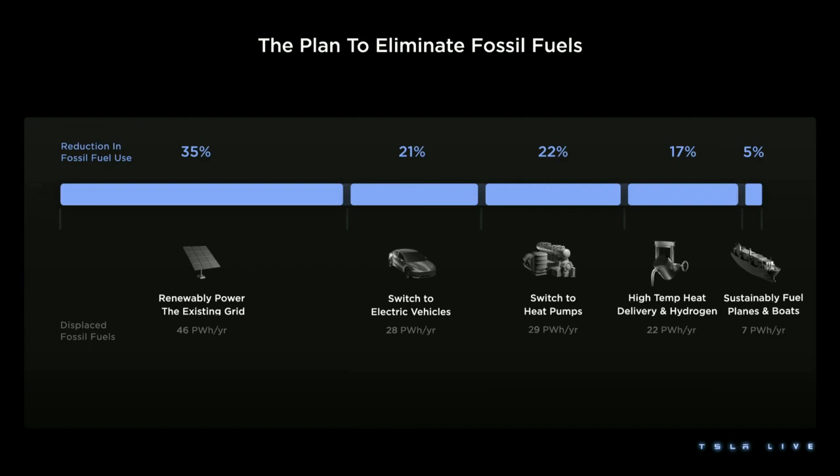My personal opinion is that as we improve the energy density of batteries, you'll see all transportation go fully electric, with the exception of rockets. That's awkward.

But you can make fuel with CO2 and water - you can make methane with CO2 and water, and you can do that with just electricity. In fact, on Mars, if we hopefully get there at some point, the atmosphere is CO2, and there's water ice throughout Mars. So you can take the CO2 and H2O and turn that into CH4, which is methane, and oxygen. So ultimately, even rockets can be electrified.

First, repowering the existing grid with renewables. This is going to be a consistent theme - you'll see our estimates for the number of terawatt hours, terawatts, and trillions of investment at the bottom of the page. This is already actively occurring in front of us. 60% of the generation added to the US grid was solar in 2022, and solar deployment is growing 50% year-on-year as of 2022. This is a serious upswing, and if we continue this trend, this is going to be behind us before we even know it.

Second, switching to electric vehicles. Again, 21% reduction in fossil fuel use by doing this alone. Obviously, Tesla is heavily engaged in this activity, along with many others. Overall, EV production grew 59% year on year in 2022, and EVs hit an amazing 10% market share. It's an awesome milestone, I'm super excited to see that.

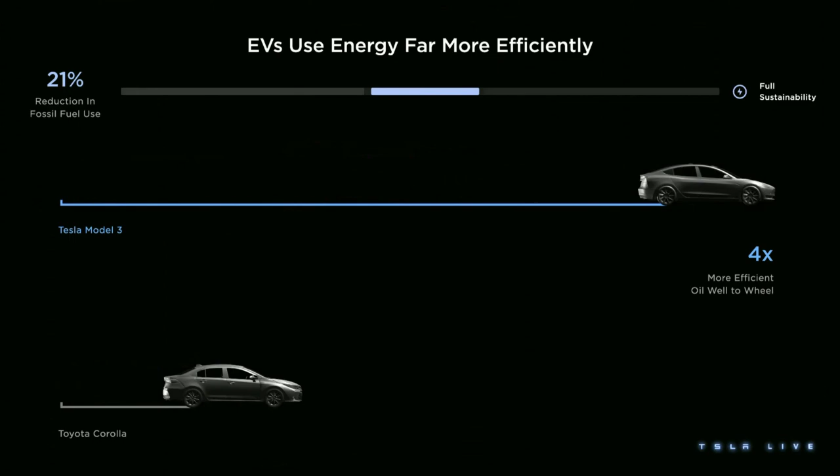One of the reasons why EVs are so enabling is this end-use efficiency point. Tesla Model 3 is 4 times more efficient from well to wheel than a Toyota Corolla. That's all about the efficiency of getting the electricity into the car in a sustainable energy economy, and then how efficient the car is in transferring that stored energy to motion on the road, compared to the engine in the Toyota Corolla and all the extraction, refining, transmission, distribution of the gasoline to the Toyota Corolla. And just for a fun reference, Model 3 can drive over a mile on the energy it takes to boil a pot of water for pasta, and then it can drive another mile on the energy it took to cook the pasta. And that pasta is 1 pound, and Model 3 is like 4,000 pounds - just to give you a sense of how little energy it really takes to move a Model 3, that 4,000 pound object, down the road.

Also, heat is a lot more energy than motion. But people just boil a pot of water and don't even think about it - it's just interesting how efficient these cars are.

Next, switching to heat pumps in homes, businesses, and industry.

Right now, heat pumps meet 10% of building heating needs. Install rates are growing 10% year on year, but it really needs to accelerate. Heat pumps can serve heat applications up to 200 C in businesses and industry. And from an investment perspective, as you can see on this page, this is actually the lowest hanging fruit in terms of displacing fossil fuels.

You might be saying, well, what exactly is a heat pump? Heat pumps don't create heat, they move heat. When you think about the natural gas furnace in your house, it is generating heat itself, but what the heat pump is doing is actually moving heat from outside of your house into your house. They're just an air conditioner or a refrigerator in reverse.

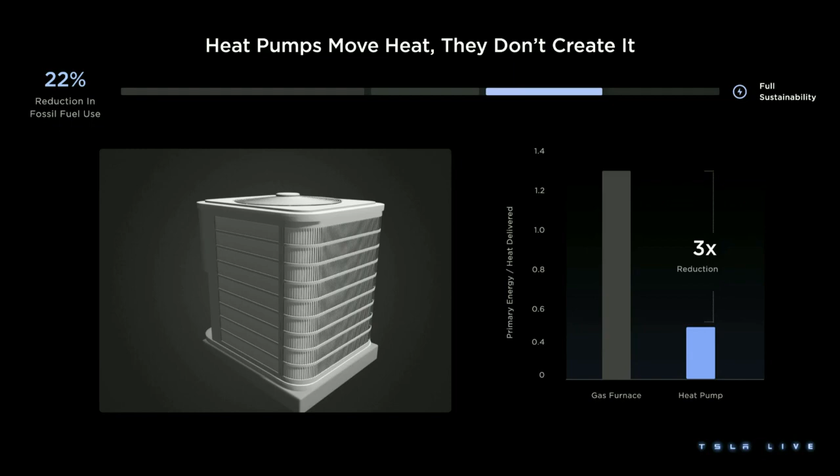So we're surrounded by heat pumps. They're all over this factory, they're in your house. And all this really is about bringing them in to displace all the fossil fuel heating in all of the homes, businesses, and industry that we can. From an end-use efficiency perspective, this is a three times reduction in the total energy required to heat these buildings. So a real obvious thing to do.

Heat pumps, they're in our cars now as default. And at some point, we might make a heat pump for our home. So, yeah, maybe.

Next, a little bit more detail on electrifying high-temp industrial chemical processes. Over 50% of industrial heat is greater than 400 C. Cement, steel, fertilizers, chemicals, plastics, metals refining all need up to 1,500 C. So we need a solution here.

Ultimately, it's purpose-built equipment that enables electrification. Carbon graphite is stable up to 2,800 C. There's other options in the 1,500 C range, like silicon carbide and other materials. The idea is you create and store heat when renewable power is available. If this is a sustainable energy economy, renewable energy is intermittent. At peak of the day, you've got more generation than you need. You make a bunch of heat then, and then you transfer that heat into the industrial process 24 hours a day using the stored heat you created when the sun or the wind was blowing.

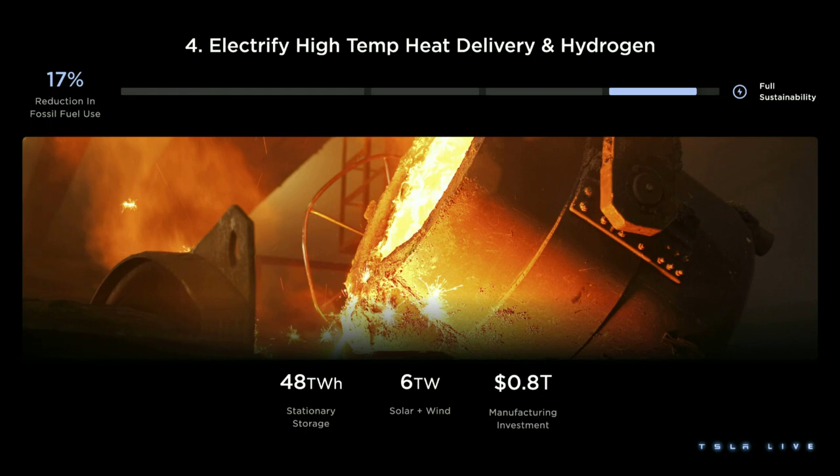That's the concept here. And on the hydrogen side, we also need green hydrogen to decarbonize metals and chemical refining processes, things like ammonia and steel making. There's roughly 120 million tons of hydrogen sourced from fossil fuel today to do these things. Hydrogen can also directly replace coal, which is currently used in a ton of steel production, through a process called direct reduced iron. You can replace blast furnaces with a hydrogen-reducing, direct reduce iron furnace. This is the way to eliminate fossil fuels from these aspects of the economy and the CO2 associated with them.

Some amount of hydrogen is needed for industrial processes, though there's room to disagree on the details. My personal opinion is that hydrogen will not be used meaningfully in transport, and shouldn't be. If you're going to use a chemical fuel, you should use CH4, not H2. But nonetheless, it is needed for industrial processes and can be produced just by splitting water, essentially. Something that's been done for decades and decades. This is not rocket technology.

And lastly, a small part of the pie, but a necessary part, is sustainably fueling planes and boats. Shipping accounts for 3% of global CO2. It's ripe for electrification. Even with lithium iron phosphate, long-haul ships can be fully battery-powered. So that's a great opportunity to electrify.

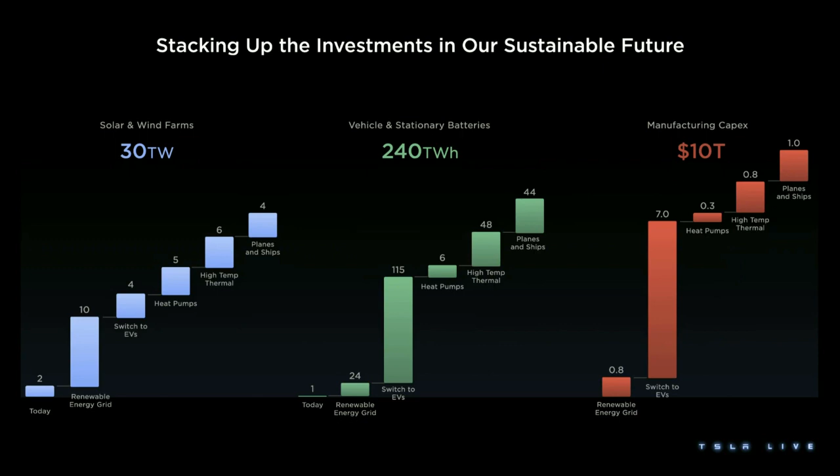So when we stack up all of these efforts, we end up with the numbers we shared at the beginning of the presentation: 30 terawatts, 240 terawatt hours, $10 trillion. And you may be saying, I need some context. Is this feasible?

Spoiler alert, it's entirely feasible. Just looking at it from a growth rate perspective, how much do we need to grow the deployment of these technologies? We're talking about only a 3x growth rate in solar and wind deployment. Solar is already growing at a breakneck pace, as is wind.

This gap is going to be closed really quickly. When we look at electric vehicles, they have to grow 11x. Well, they grew 60% year on year last year. That growth rate is also going to close that gap pretty quickly as well. And lastly, storage. Tesla's energy storage business has grown at 65% CAGR since 2016. The global energy storage business is accelerating pace as well. All these gaps are going to close, especially as this momentum of the transition to sustainable energy accelerates.

And of course, our goal on this page is 20 million EVs per year and 1 terawatt hour of stationary storage per year, basically as soon as we can.

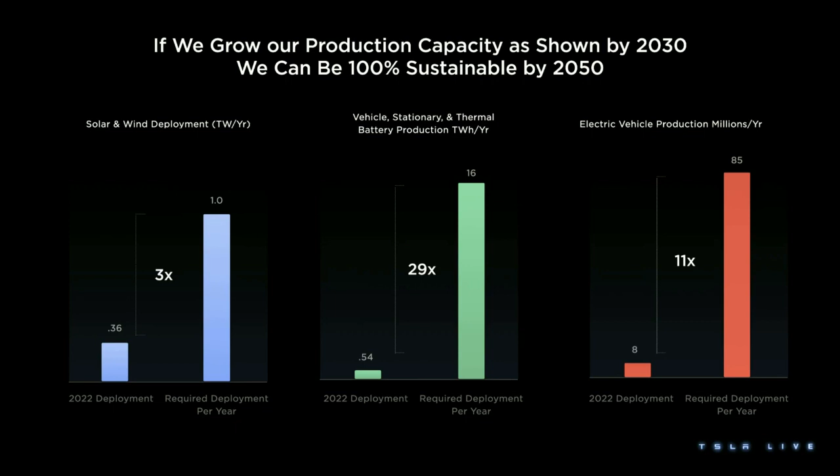And then, what about this investment? How do I have a reference point on this investment? Elon mentioned it's 10% of one year's world GDP. Another way of thinking about it is, how does it compare to what we invested last year in fossil fuel infrastructure? It's 60% of that investment. So actually, building this sustainable energy economy is less than extending the fossil fuel economy from a year-over-year investment basis.

So very doable. When we look towards, does this fit on the planet? Absolutely, less than 0.2% of land. As a reference point, the total land area intensively farmed today is 12.5% of all land. You drive around, you see some farms, but you don't see them everywhere. This is more than an order of magnitude difference between farming and what we're talking about for sustainable energy land. And it doesn't need to displace farmland.

Forests or jungle or any kind of ecological preserve - it can be used in very sparsely populated desert regions, barren areas, areas that are just not really fit for development or otherwise used. So 0.2% can fit into a lot of places. There's essentially no meaningful ecological impact. In fact, transition to a sustainable energy economy would result in a substantial reduction in current ecological impact.

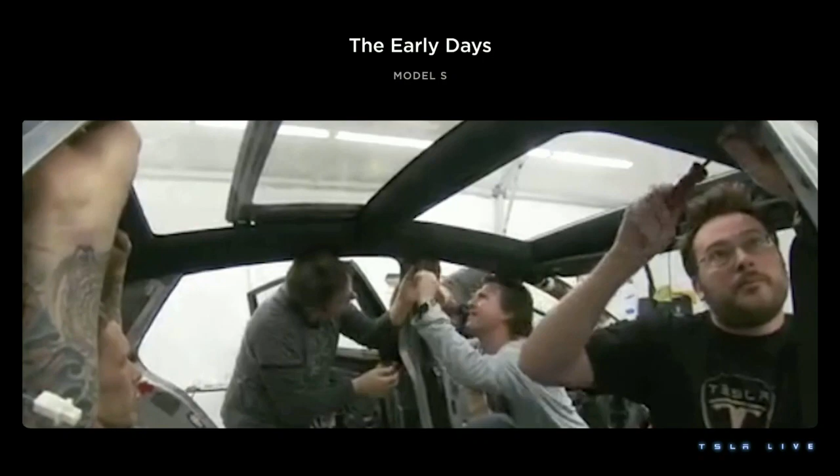I joined Tesla in 2008 to vertically integrate design into the company. It didn't exist before, it was a pretty small team. It was tasked with designing the most beautiful, innovative, and well-engineered vehicles on the planet. No small task in 2008, there was not a lot going on in the EV sector then.

Since then, we focused on constant improvement in cost, efficiency, innovation, things you'll continue to hear about today, while continuing to design the most desirable cars. Today we produce cars differently than we did 10 years ago, but the end result is always an exciting, futuristic, and desirable set of vehicles.

Back then we only had a handful of designers and engineers like myself, but we had a great vision to radically change transportation.

Back in 2008, when we were designing Model S, we didn't have a factory. In fact we had a really small engineering team and a tiny design team. But that allowed design to lead all the conversations. It let us innovate forward-thinking ideas, like how do you fit 7 people into a sedan? Or how do you make door handles disappear into the doors? Or putting a huge touchscreen into the center of the vehicle, something that had never been done before.

And then we won Motor Trend Car of the Year, in 2013. Our first great award, first car. Pretty good start, kind of a home run, I think.

Yeah, I mean, I think that's really important. When we were designing the car together, we didn't even know where we were going to build it. And so we came up with... I didn't even know Lars when we were designing. That's true.

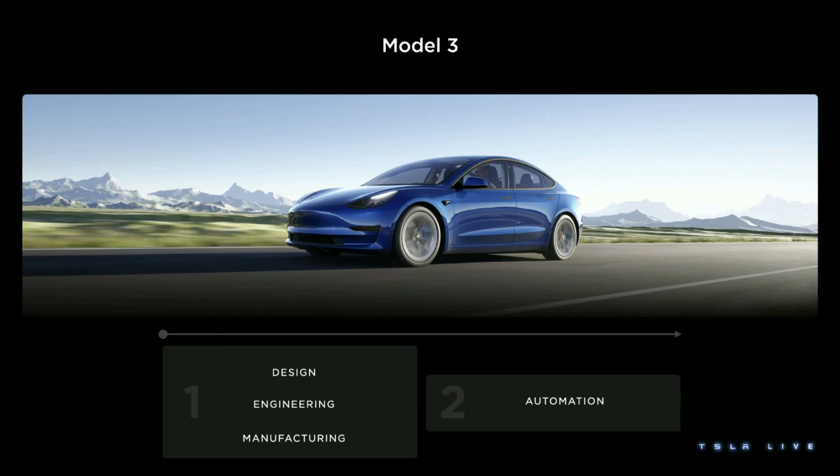As part of the master plan that you've read, Model 3 needed to be a smaller, more efficient, and more affordable version of Model S. But it had to be equally great. It had to have all the things that people loved in their Model S or Model X, but be much more affordable. So we approached the process a little bit differently than the first time around. Now we had teams that all worked together, so we were able to combine design, engineering, and manufacturing process all at the same time.

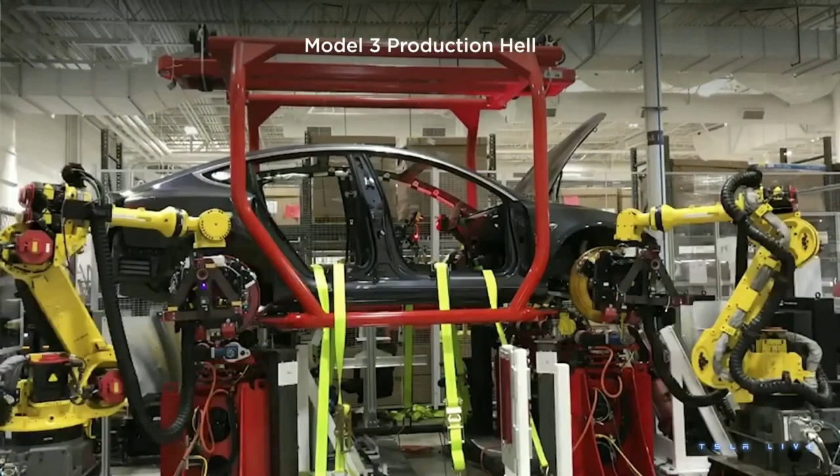But somewhere along the way, we changed the manufacturing process to be fully automated. And so we leaned into this whole new way of manufacturing a car, but we had already engineered it. So things didn't quite go as well as planned. It was an amazing product, but it landed us in production hell. Many of us who lived through that carry those battle scars. It was a great idea, but it wasn't the right timing.

Like Franz said, automating something that we designed to be built manually is super hard. And we have many, many failed examples of that at the Fremont factory that we ripped out. But some of them eventually still work. This is one I actually worked on with a small team of engineers. It's still running today, and some of the engineers who said we couldn't do it are no longer with the company, but it's running, and it's running faster than ever.

So we kind of self-imposed constraints on the design when we were doing it to be built manually, and we really didn't think about it. But despite all that, Model 3 is the best-selling EV ever. And Model Y, which is derived from Model 3, is about to pass that.

But we knew we had to improve the process further. And with Cybertruck, we designed a vehicle around a vision that actually started with the manufacturing process. And in this case, the materials dictated the design. Forming full hard stainless steel isn't rocket science, but it sure isn't easy. And it limited the way we could do it.

Yeah, absolutely. It really forced us to think about designing something in a way that you couldn't normally stamp panels. You couldn't form them in a traditional way. So you ended up with very linear bending processes that are just not in the automotive language of manufacturing today. But it actually created a very efficient process and one of the most dynamic designs ever, I believe.

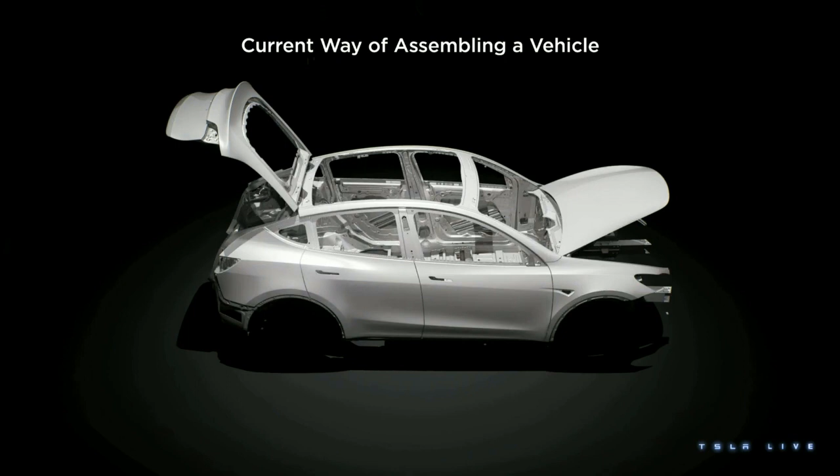You take all these stamp panels, put them together, then put them in a framing station. You build a body that looks something like a car, put the doors on, and then you paint them. Once you get the color, you take the doors off and start putting the interior inside the car.

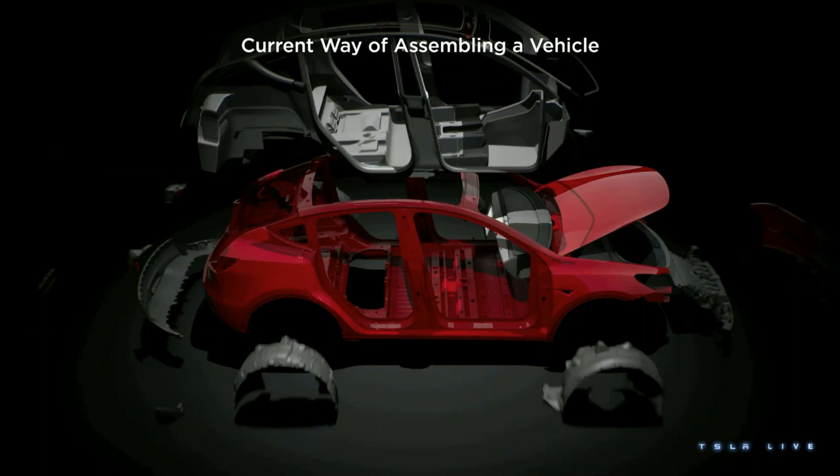It comes in through the openings that already exist. I wish it went in like one big piece, but there's actually people coming in and out of the car. There's awkward movements.

Then we lift the car up, we put stuff from underneath it, we put it down, then we put the seats in the car. And finally we close it all out with glass, and we bring those doors that went away for a trip, and put them back in the car.

Most of the time we're doing this with a big, giant car and moving it and doing really nothing to it at all. What's funny though is that just recently Toyota called this an engineering work of art. True.

The Model Y - that was humbling, but at Tesla it's not good enough. If we're going to scale the way we want to, we have to rethink manufacturing again. As part of the master plan, we have to make another step change in cost.

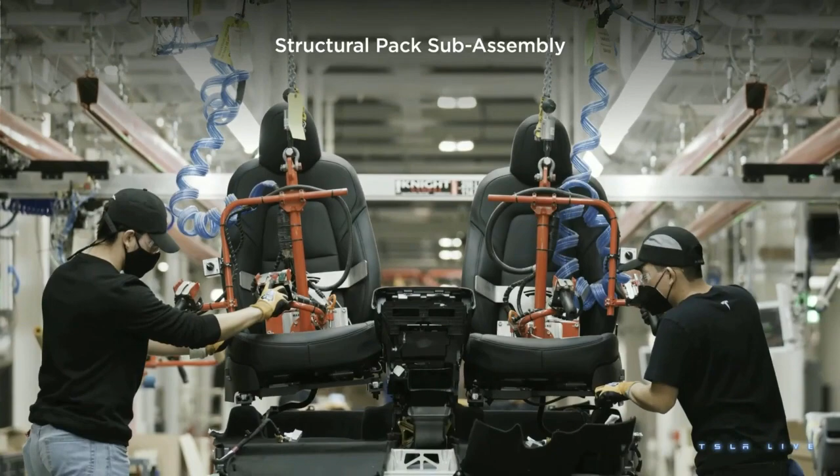We simplified assembly with the Model Y structural battery, where we decided the floor should be a part of the car. The battery is the floor. We put the seats and the interior on the battery, and we bring it up through a big open hole, and we assemble it. This allowed us to do things in parallel, fully rethinking the process and reducing the final assembly line by about 10%.

And we thought maybe we could do this other places. Yeah, in a way the constraints become part of the solution rather than a problem.

So when you think about what I'm trying to say, I really want to hammer this home. When you have a car that's about 5 meters long, and you have people working around it like we did in Model 3, and we change that to this process where we take different parts of the car, and we can do more at the same time, like we did with the Model Y structural battery pack.

What you see here is us doing that on the front part of the vehicle, or the rear part of the vehicle. That means we can get more people, or robots, working on the car at the same time. That means we have better operator density, less time doing nothing.

I call that space-time efficiency. It has nothing to do with quantum mechanics - we can have that conversation later. But we get 44% more operator density, which means more work, less time walking back to the station, 30% improvement in space-time efficiency.

And because we're not building it in and out of the car with those slow movements of those robots I showed you from production hell, when we go to automate it, it's going to be a lot easier.

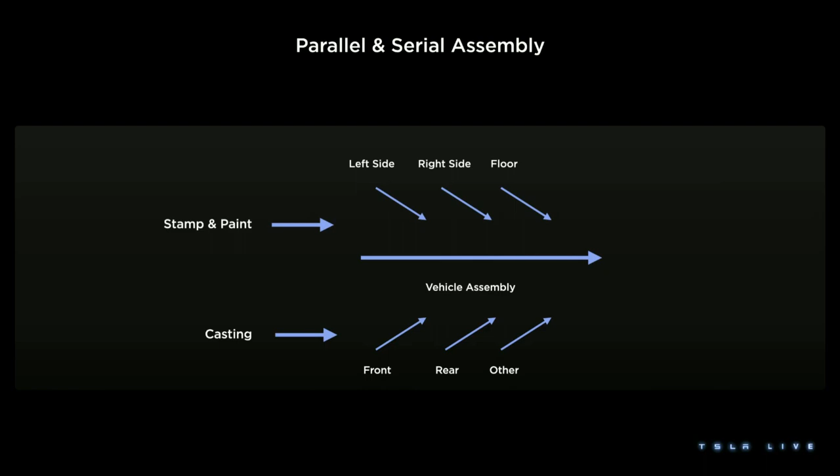In the end, that will probably look something like this, where we balance parallel and serial manufacturing in a way where we only do things that are necessary, with a much shorter final line, blocking a lot less of the entire rest of the factory, so we can optimize material flow using the best practices.

And what that means is it's going to look something like this, where we build all the sides of the cars independently, we only paint what we need to, and then we assemble the parts of the car once and only once. We put them where they need to go.

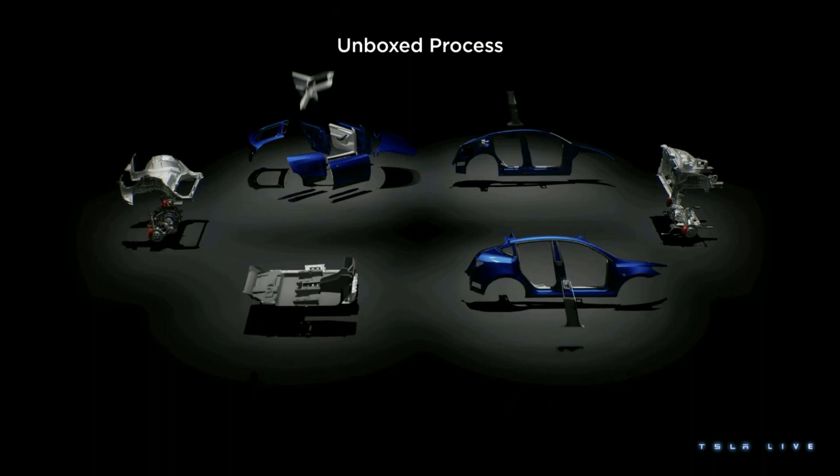The interior is attached from a bottom-up or top-down strategy, so there's more access for those robots and people. We aren't moving heavy objects around and doing nothing to it, and it means we're doing more work on the car more of the time.

And then, when we take all of these tested sub-assemblies and put them together, we finally assemble the car only one time, putting the sides on with all of their parts to a front and rear that was already assembled, carrying the floor in with the seats, and finally boxing it out with the doors one time - just like Cybertruck. So in the end, you get the same car, but it's not going to be a Model Y.

Yeah, this is not - this is a Model Y for illustration, not the next-gen vehicle.

In the end, what does that mean? To increase the scale and adoption of electric vehicles on the orders of magnitude that we just showed you, we have to make constraints part of the solution. It leads us to greater than 40% reduction in footprint, which means we can build factories faster, with less CapEx and more output per unit.

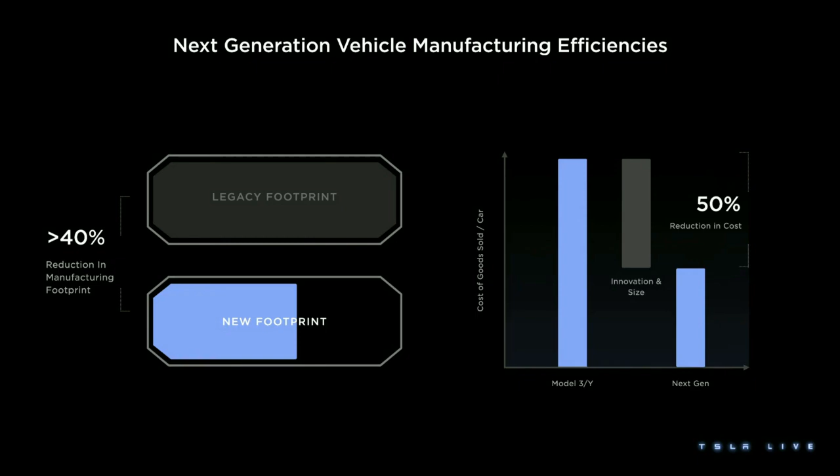Faster, less CapEx, more output per unit dollar. Zach's going to go into more details on this later, but through this innovation and what my other engineering colleagues will talk to you about, we'll reduce costs by as much as 50%. This is the 2-for-1 concept you hear me and Elon talking about on earnings calls.

I think our track record proves that we can deliver the best cars, and we deliver the best cars in spite of, and because of, these constraints. I'd love to really show you what I mean and unveil the next-gen car, but you're going to have to trust me on that until a later date.

I promise we'll always be delivering exciting, compelling, and desirable vehicles, like we always have. Have we ever not? We always do. But what else is Tesla known for? Speed. So with that, I want to bring on Colin, who's in charge of making our cars go fast.

Thank you, Lars. Thank you, Franz. My name is Colin Campbell, and I have the real privilege of leading powertrain engineering here at Tesla. We make the fastest cars that you can buy for the money, whether they're electric or gas. And the Model S Plaid that we're looking at here has more than 1,000 horsepower, and pound per pound, the motors in that car are as powerful as jet engines.

Our cars are super fun, people absolutely love driving in them. And the other thing you probably know about our powertrains is that they're efficient. Our cars go 25 to 30% further than other EVs in our class for the same amount of energy. But at Tesla, efficiency means more than just reducing how much energy the cars use. It's about how we develop, manufacture, refine, and scale the powertrain.

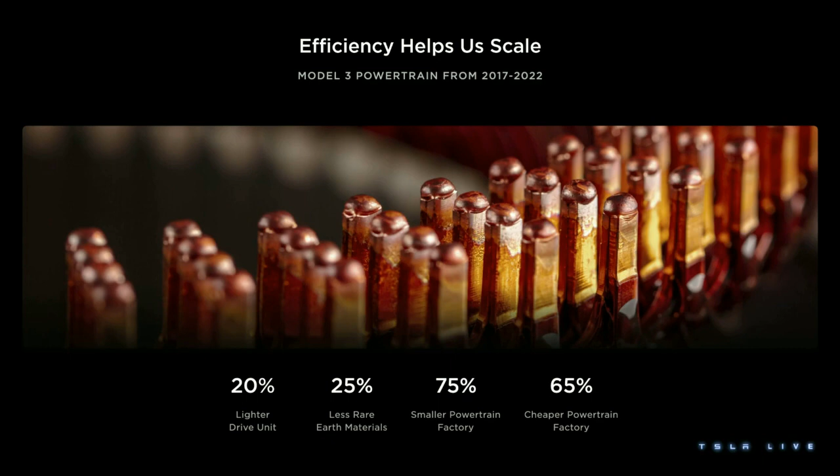What I really want to emphasize is that we did all of this without compromise. Our cars are just as powerful, they go just as far, they cost the same or less, and the factories have the same output. So, how did we do that?

We did it by designing the entire vehicle and the entire factory together as one company. This sets Tesla apart. We have small and highly capable teams, and to make a critical decision, we can have the battery cell chemists, the mechanical engineers, the manufacturing engineers, the supply chain team, the automation designers, and the software programmers all in one room, working together in real time. That allows us to make decisions that are best for the whole car, and to make them really fast.

That approach is unlike traditional automotive engineering, which is really fractured. If you were to go buy a premium German electric car, the engineers who designed the drive inverter in that car did not work for that car company. They worked for a contractor. At Tesla, we designed the entire car and the factory that builds it.

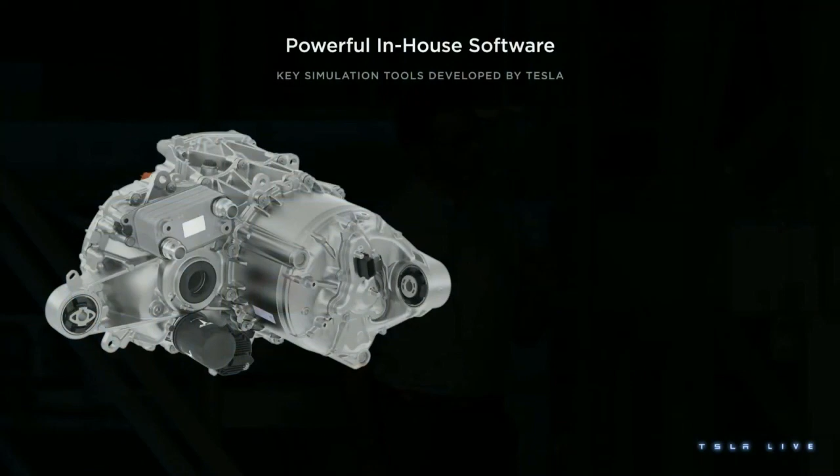So this is the drive unit for Model 3 and Y, and if we take a cross-section, we see the stator and the rotor, and they're responsible for the core function of the drive unit, which is converting electricity into motion. And our custom software lets us simulate the rotating magnetic field that is responsible for that conversion.

And getting that simulation exactly right, it's central to the cost, the weight, the size, and even the sound of the drive unit. And now, you can buy software that will do all of this, but our tools are faster, and they're more accurate, and that was not easy to do. And that allows us to quickly iterate through millions of possible drive unit designs to find the best one.

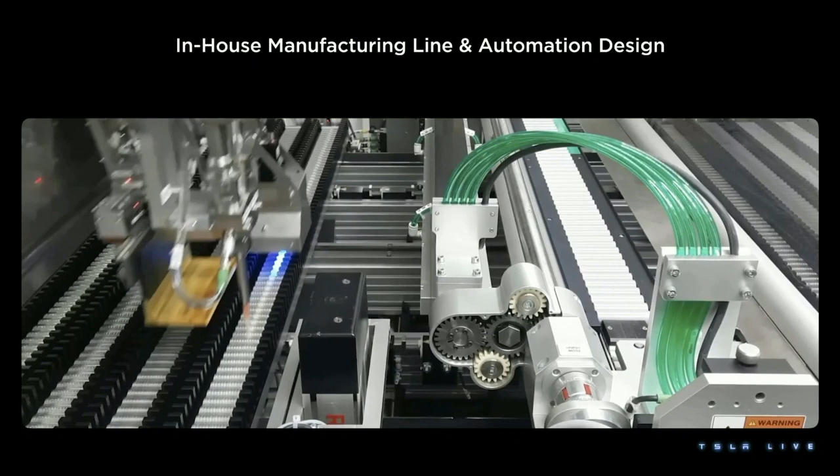I want to highlight one more area where Tesla really excels because we integrate work that is often farmed out. So when you are making a new product, it's not enough to think about the product itself. You have to think about how you're going to make it at scale.

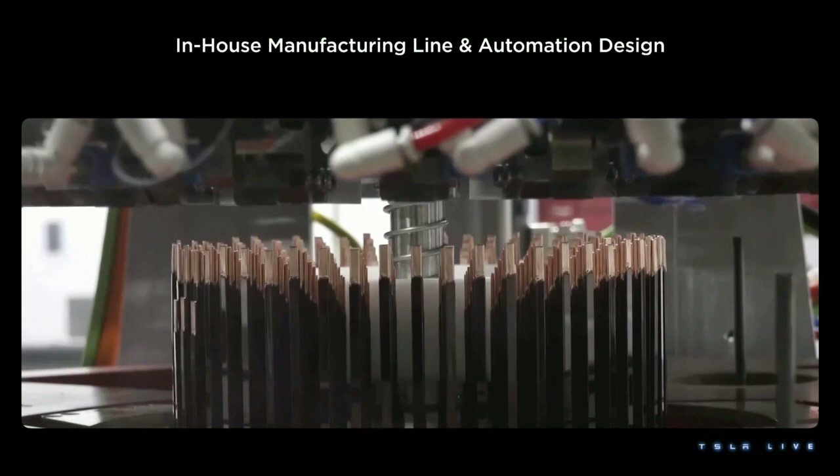So at Tesla, our powertrain and our powertrain manufacturing equipment is both designed under one roof. The engineers who are designing the motor, they are in the same room as the engineers who are designing the machine that's going to put that motor together. And that collaboration pushes us from day one to design products that are not only high performance, but are really easy to assemble.

So, all of this expertise that we have in the powertrain team, in hardware, in software, in manufacturing, it's going to have a major impact on our next platform.

In our next powertrain, so those silicon carbide transistors that I mentioned that are a key component but expensive, we figured out a way to use 75% less without compromising the performance or the efficiency of the car.

And of course, we know that battery cell supply is one of the constraints on the scalability of EVs right now. Our new powertrain is compatible with any battery chemistry. And that will give us great flexibility in battery sourcing.

If we want to make EVs more accessible to people, they have to be cheaper. We've reduced the drive unit cost to about $1,000, and we don't think any other automaker is even close to that number.

Finally, the bigger a factory is, the longer it takes to build. If we can build the same number of cars from a smaller factory, we are going to be able to scale EV production faster. Our next powertrain factory is 50% smaller than the one that's behind me today, even though it has the same capacity.

All of these improvements, I think, are going to be transformative for the adoption of EVs and our ability to scale them. There's one more thing that I want to highlight.

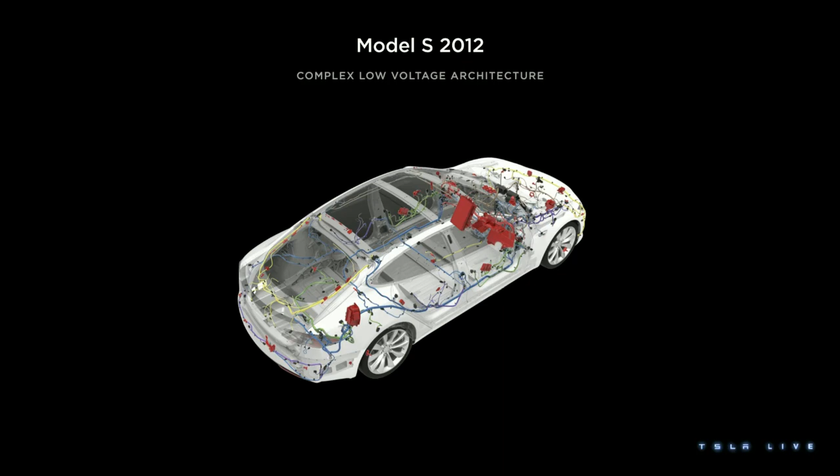Pictured here is the low-voltage system of a Model S from 2012. This car was primarily designed with vendor-sourced controllers integrated by Tesla. There are over 300 low-voltage devices that encompass everything from the mundane, like the light in the glove box, to the complicated, like the infotainment computer, to the safety critical, like the airbags, steer-by-wire, and brake-by-wire. The low-voltage harness is built from individual wires, cut to length, crimped, and inserted into connectors, a manual process.

That process is tedious, error-prone, and doesn't scale well. Going forward, we want to reduce the size and complexity of the harness and enable automated manufacturing. These wire harnesses introduce extraordinary complications, especially in the early stages of development and bring-up of a vehicle, because when we're trying to bring up this entire system and see that it's not working properly, we don't know whether it's a problem with the software, the controller, the processor, or any of the endpoints in this entanglement of wires. So we have to go and debug everything all at once.

And Pete's going to tell us about how we're going to make it better. So I'm going to talk briefly about a few things that we've changed over the years since the Model S.

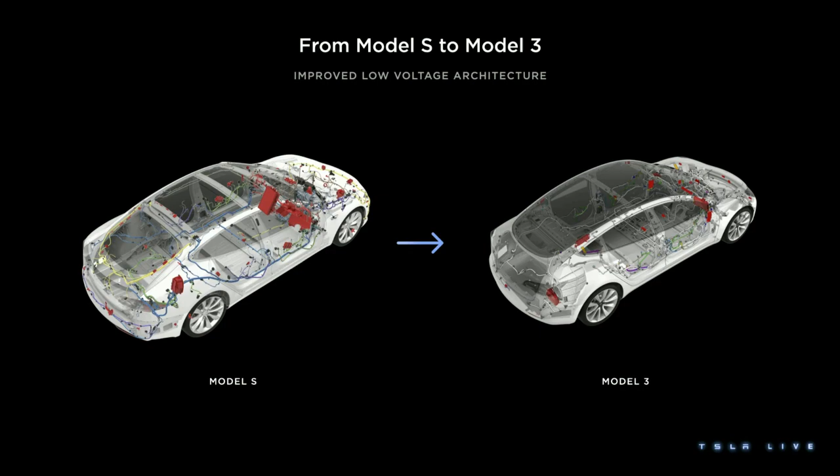With the Model 3, Tesla started designing an increasing share of our controllers by merging controllers together, and we were able to simplify the design with a significant reduction in wire count and weight. Going from S to 3, we reduced the wire harness by 17 kilograms compared to Model S. This is a pretty big deal — just to put that into context, our VP of Engineering, Lars, will deliver a bottle of your favorite spirit to your desk if you manage to save a kilogram of weight from the car. So this improvement cost him quite a lot.

Did we skip one? Yeah.

The original Model 3 controllers were enhanced and then built into Model Y. Those improved controllers were then moved back into Model 3 when we introduced the heat pump. At that point, we had shared controllers across both cars, which helped simplify our supply chain. Those Model 3 and Y controller designs were then updated and enhanced for the new versions of Model S and X that we introduced in 2021.

For Cybertruck, we are now designing 85% of the controllers in the car. For the next-gen platform, we're going to finish the job and be designing 100% of the controllers, giving us full control of the design and the supply chain at the component level. Having full control of the supply chain at the component level has been critical to Tesla over the last few years as supply constraints have hampered our ability to build cars.

And with that control comes control over all the software, which enables us to develop features and functionality that we never even dreamed of at the time we designed the hardware. So that's why you see software in your cars getting better and better over time in ways we didn't even think of when we designed the hardware in the first place. Yeah, Sentry Mode is one of my favorite last-minute changes.

With the introduction of Model 3 in 2017, we deleted relays and fuses from the car in favor of e-fuses. E-fuses replace moving parts with solid-state transistors. They provide fine-grained control of the power system to software and allow software to do advanced things like load shedding in the car under adverse conditions. E-fuses also allow for software-controlled retries for transient faults, and they allow for detailed monitoring of the power system over time.

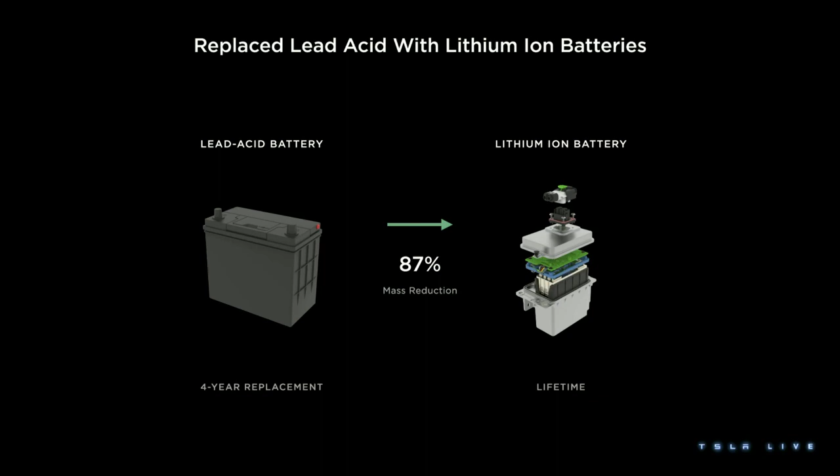In 2022, we completed the transition from lead-acid batteries to lithium-ion batteries, which use a new toolless connector. We expect lithium-ion batteries to last for the life of the car, so we don't expect anyone to wake up to a dead battery ever again. This eliminates a major source of failures for our car. The toolless connector makes it easier to service the car, and it also includes a software feature to allow validation that the connector has been properly installed at the end of a service event, which removes another source of failures in our cars. Obviously, the mass and volume savings are also significant, which is super helpful.

At Tesla, we're always trying to improve every single component in the car, and a nice example of that is the 15-inch display that was originally shipped in the 2017 Model 3. Over time, the cost of the display has gone down 24%. We've been able to reduce the weight by 12%, and we've reduced the power by 33%. At the same time, we've increased the brightness of the display by 50% and improved the color accuracy. So this is one of our favorite things at Tesla, is to make a component cheaper and better.

At Tesla, the drive to improve efficiency in the car is never ending. I think of it as like peeling a carrot. You just take a swipe at it, a little bit falls off, doesn't really make much of a difference. But if you just keep at it, over time it accumulates into a pretty significant improvement.

One of the changes we're looking to make right now is to change something that's been steady for the last 60 years: 12 volts. The demand for power in the car has been steadily increasing to the point where we now have to have pretty large wires to drive over 200 amps of current around the car, which increases the mass and cost.

With Cybertruck and all future Tesla platforms, we will be moving to 48 volts. This reduces the current needed by a factor of 4. And since power loss in the harness is resistance times the square of the current, a 4x reduction in current leads to a 16x reduction in lost power while distributing energy in the car. That allows for smaller wires, smaller e-fuses, and smaller controllers. It also allows us to make those heat sinks smaller, or in many cases, remove them completely, all benefiting the car in terms of mass and weight.

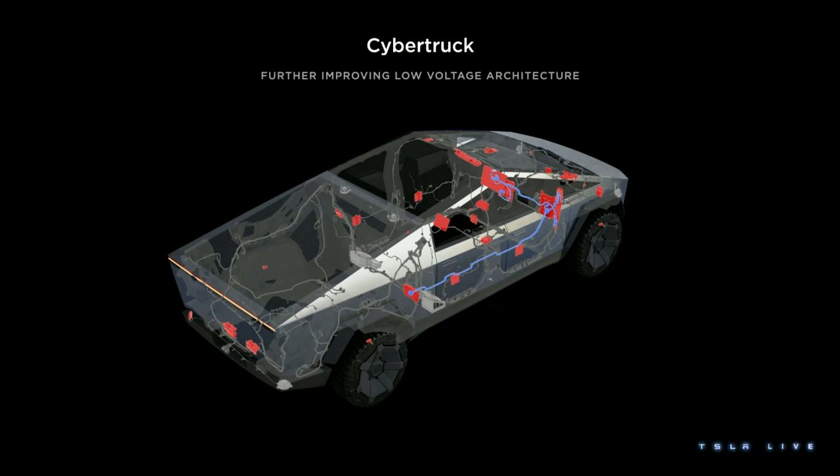To be effective, the network must be reliable, have low latency, and low jitter, and these are all attributes we've been able to achieve with the current design. The design has eliminated most of the cross-car wires in Cybertruck, and with the next-gen platform, we're going to finish the job and eliminate all of them.

This consolidated vehicle network allows us to make a whole lot more dynamic changes on the fly to how components in the vehicle talk to each other, rather than the traditional approach of separate CAN buses spread throughout the vehicle, and fixed in hardware. One of the nice things is that you can see the entire vehicle through a single connection, which wasn't possible in the past for debug.

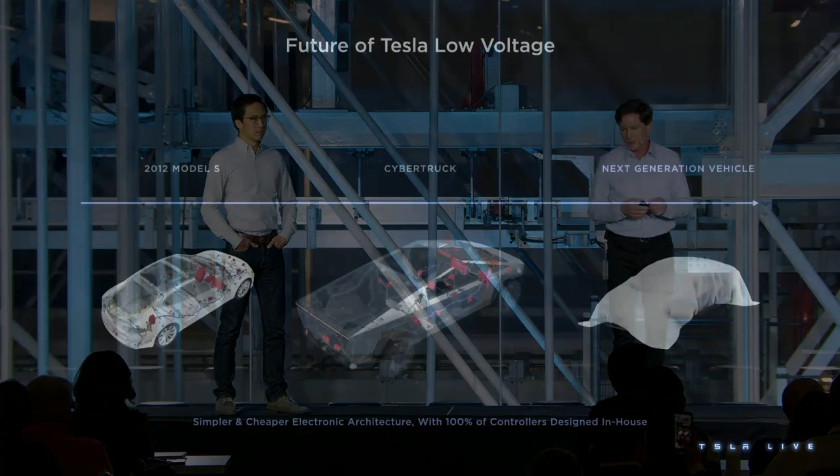For the next-gen platform, we're looking to optimize the controller design across the entire car and across all of the organizations, not just for a given subsystem. Simplifying the wire harness will enable automation. 48 volts will allow us to reduce the size, mass, and cost of the low-voltage system, and it's one of the key things enabling us to scale production of the low-voltage systems for the Master Plan 3.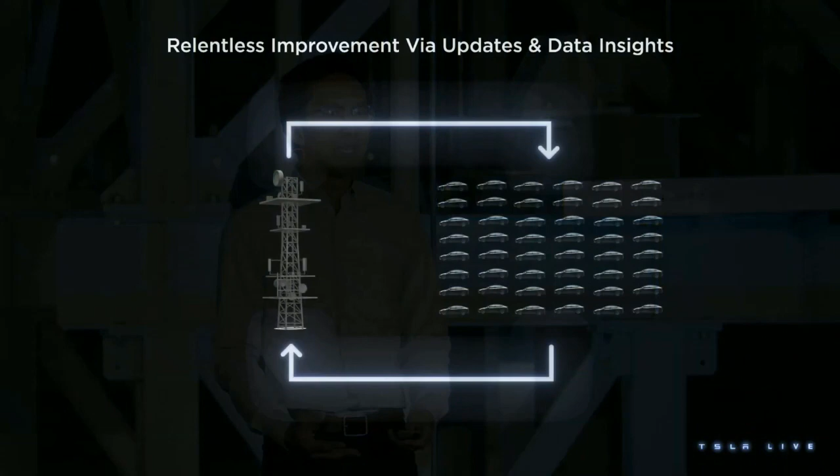So I joined Tesla in 2012, and even in those very early days of the Model S, we already had the ability to update software over the air in all of the controllers throughout the entire vehicle, at a time when other cars were just starting to update software in only their infotainment units. Furthermore, we've had sophisticated, anonymized data logging and telemetry capabilities that allow us to understand how the fleet is doing, what customers are doing with it, and how it's responding in the field to that usage. These two capabilities combined, OTA updates and data insights, give us the ability to iterate quickly on our software and to maximize the amount that we learn and the progress that we make in every iteration. We've used these capabilities to inform countless design decisions in both software and hardware.

One example is that we were able to monitor and track the use of the sunroof in our cars and found that our customers never use their sunroof, so we made this easy decision to remove it. We haven't had sunroofs for a while.

As another example, we are able to use our collision data to design our crash safety systems for what happens in the real world, far beyond what regulatory and consumer ratings tests prescribe. And furthermore, we're able to use that data to recreate in simulation all of those crashes every single time we make a change to the vehicle's design or to the software that controls the airbags and other restraint systems.

Last year, this data was used to change the algorithm for seatbelt tensioning to reduce injuries in the field, which was pushed OTA to all of our cars.

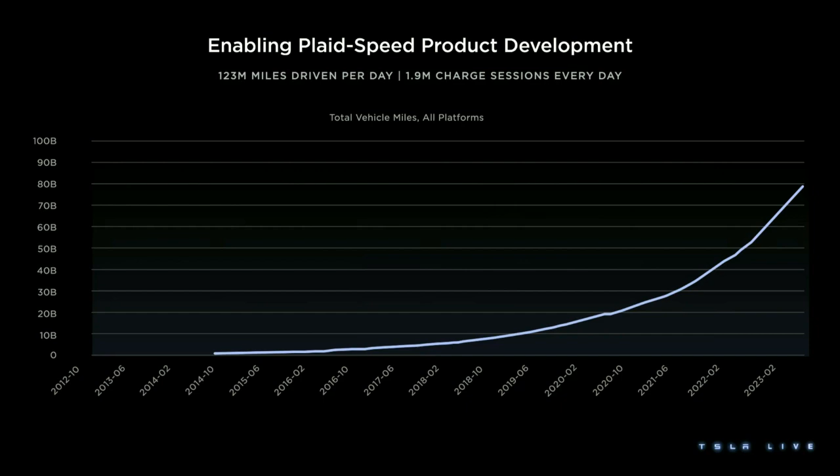As another example, we've analyzed patterns in the way the fleet drives and charges to optimally size battery packs for our next generations of vehicles. You'll hear lots of other examples throughout the rest of the day about how we're using data to inform decisions in the product and in manufacturing.

You've heard a lot from Pete, Colin, and others about how important vertical integration is for us in hardware, but it's especially important for us in software. This is extremely difficult given the way the rest of the traditional automotive supply chain is set up.

In most situations, all the controllers in the car are delivered by different Tier 1 suppliers, whose software is written by Tier 2 suppliers, who farm some of that software out to different Tier 3 suppliers, and so on. Making a change that spans multiple components takes months of coordination before any work can even start.

Furthermore, integration of software on the server side with what's happening in our vehicles has always been a core part of our DNA and enables us to do things that nobody else can.

Most engineers think about the vehicle as a complete, consolidated, fully contained system. But on the software team, we think about the system as including the vehicle as well as all of our back-end server-side applications and infrastructure, and the resultant feedback loop from the entire fleet that informs all the decisions we make as an engineering team.

For example, we recently released a feature in Model S and X that automatically, predictively adjusts and raises the suspension for ride comfort before the car hits a section of rough road.

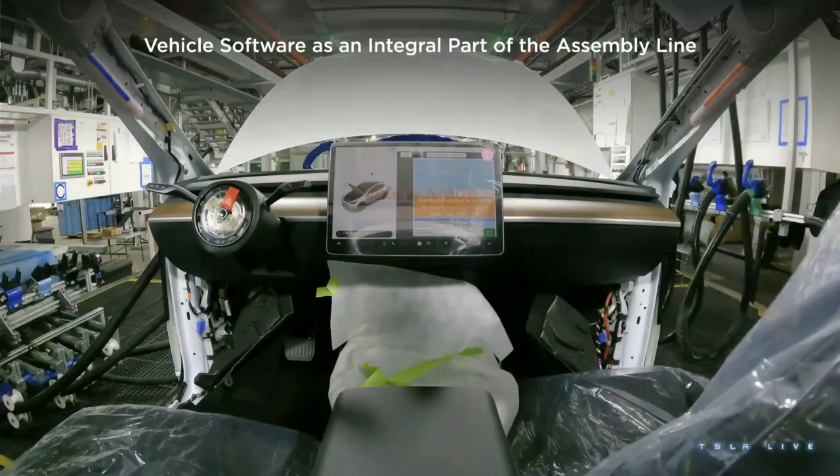So far you've heard me talk a lot about how we leverage our software systems to iterate quickly on the customer-facing product. But what I haven't talked about, and what we haven't said much about publicly in general, is how we leverage these capabilities in our own internal operations.

In the early days of manufacturing Model S, we very quickly realized that there are a lot of different ways you could misassemble a car. You could forget to plug in a wire, you could not fully set a connector, you could pull a part from the wrong bin.

So when we designed our manufacturing processes for Model 3 and all of our other vehicles going forward, we took a page from the software playbook, which says test early and test often. And we applied that mantra to every single car that we build at every step of the assembly line.

So now, when a production associate plugs something into the car, the central car computer sees that connection, confirms that it's the correct part for the type of car that's supposed to be built, installs a software update if necessary, checks configurations and calibrations, and runs a barrage of tests on that thing and all the other things that are connected to it. And if it finds an anomaly that can't be fixed purely with software, it throws an alert immediately.

That alert is displayed prominently on the vehicle's display, as well as sent to back-end command and control systems, so that a human can come over and fix the problem before the rest of the car gets built on top of it. And we're taking a similar approach in service through a combination of onboard vehicle diagnostics, natural language processing applied to customer narratives when a customer schedules a service appointment, and a suite of internally developed tools.

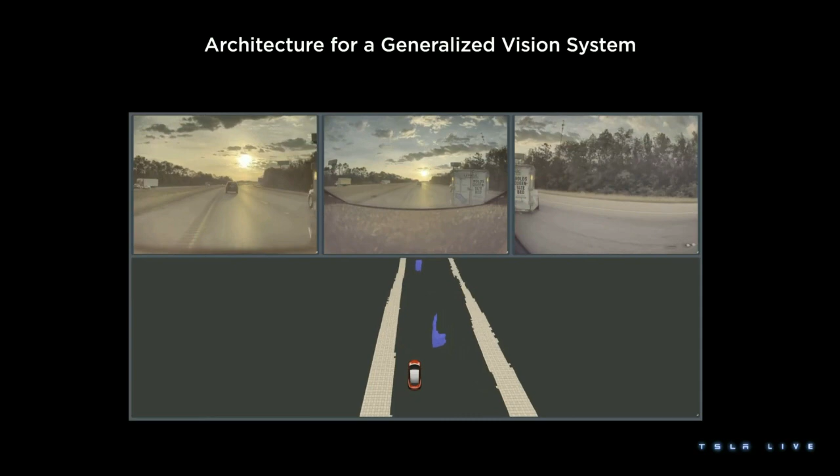Some of the tasks, such as lane connectivity, are more complicated to model using naive methods in computer vision. So we don't stop at computer vision techniques, but we reach out to techniques in other areas, such as language modeling and reinforcement learning to model this task. These networks use similar techniques, such as transformers, attention modules, and autoregressive modeling of tokens, similar to what large language models like ChatGPT do out there. With such an end-to-end system of solving perception, we have really removed the brittle post-processing steps and produced high-quality outputs for the planning system.

Even the planning system is not stuck in the old ways. It is now starting to use more and more AI systems to solve this problem. Neural network-based planners are needed especially in complicated urban planning when there's a lot of other objects interacting with us. This is, for example, an intersection where we have to turn left while yielding to crossing objects and to the pedestrians crossing the road. We have to do this both safely and smoothly while respecting everyone's right of way and preferences.

If this was done naively, each configuration would take 10 milliseconds of compute, and there are easily thousands of configurations to reason about. This would not be feasible using traditional compute. But using AI, we have packaged all of this into a 50 millisecond compute budget so it can run in real time.

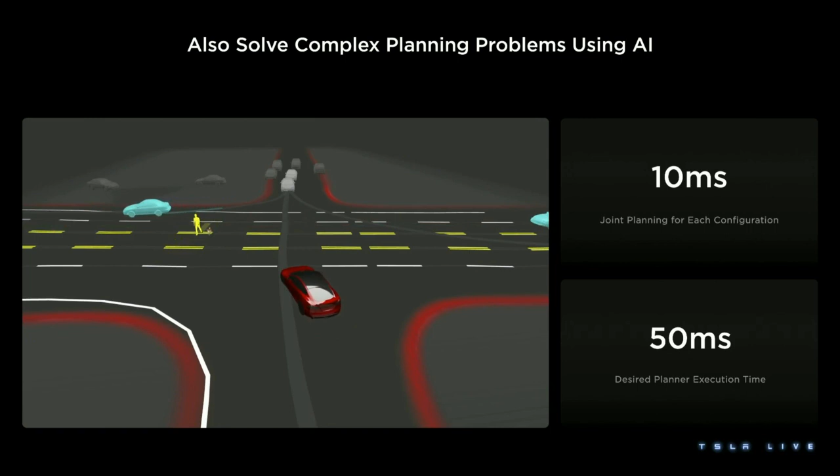The second big piece of this puzzle is the data. This is where Tesla has a unique advantage because it can tap into the fleet to access the exact data that can fix the problems.

But raw data is not sufficient. In order to train these networks, you need labeled data to supervise them. If you only depended on human labelers, this data would be too tiny to train these large multi-camera video models. We need lots and lots of data to train these networks.

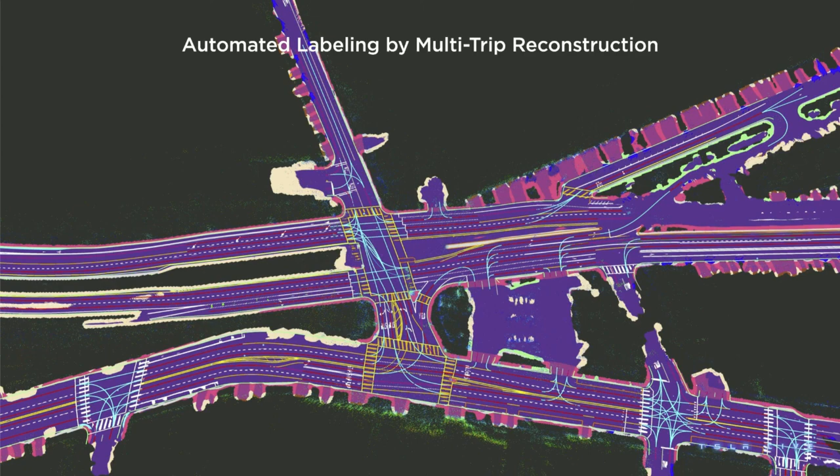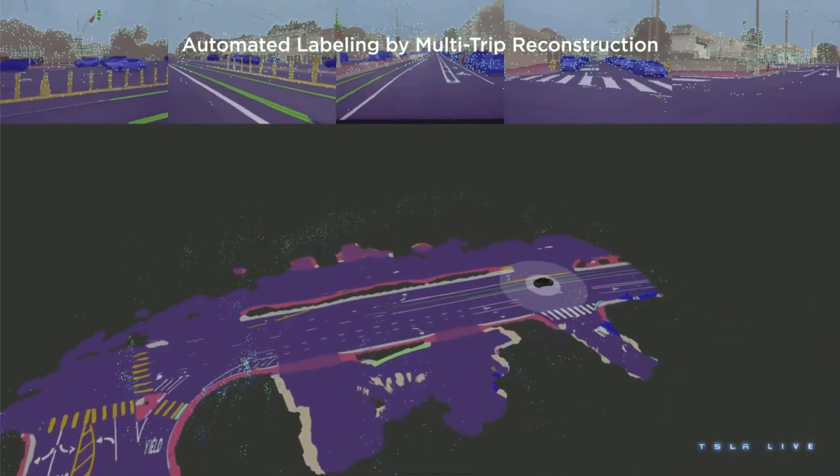Hence, we have built a sophisticated auto-labeling pipeline that collects data from the fleet, runs computational algorithms in our data center, and produces the labels to train these networks. Here you are seeing a 3D reconstruction happening by collecting various clips from different cars in the fleet and assembling them into a single unified representation of the world around the car. You can see all the lanes, road boundaries, curb, crosswalks, even the text on the road being accurately reconstructed by these algorithms.

We don't have to stop at this kind of reconstruction. Once we have this base reconstruction, we can build various simulations on top of it to produce an infinite variety of data to train for all the corner cases. We have a capable simulator that can synthesize adversarial weather, lighting conditions, and even the motion of other objects to test all the corner cases that might even be rare in the real world.

Here's an example of why this data is critical and how we can solve problems using data. Back in the days, for example, we had some false braking where we thought a car that's actually parked there was going to move into our path, and hence we were precautiously braking. But it is unnecessary because the car is truly parked. So how can we solve this?

What we did was we mined the fleet for similar cases where the car had false braking due to some parked car. We added 14,000 videos to our training set. And then once we trained the networks again with this new data, it now correctly understands that there is no driver in this car, hence it must be parked, so there is no need to brake. This is a systematic way to solve problems.

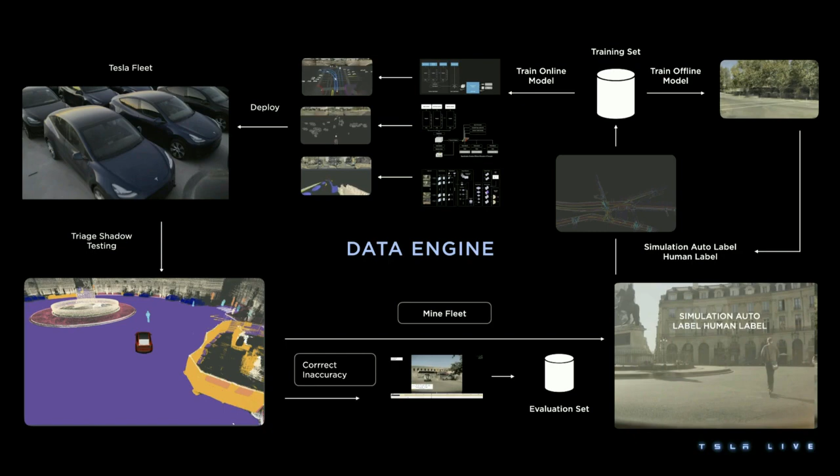The final critical piece is the compute. In order to train these large models in a reasonable amount of time, you need lots of compute. In addition, compute is also required to produce the labels automatically. This is just compute in our data centers. In addition, we also have high-power computers in the car, which can run up to 150 teraops of compute.

On the back end, we have a 14,000 GPU cluster, and roughly 30% is used for auto-labeling, with the remaining 70% used for training. We also have 30 petabytes of video cache, growing to 200 petabytes. All of this is going to significantly increase once we bring Dojo, our training computer, on board. Just to give a reference, the occupancy networks you saw earlier use 1.4 billion frames to train.

We have already shipped our FSD beta software to pretty much everyone who has bought it in the United States and Canada. This amounts to roughly 400,000 customers who can turn it on anywhere, and the car would attempt to drive to the destination. It's still supervised, but it can already handle turns, stop at traffic lights, yield with other objects, and generally get to the destination. We have observed that people who use FSD are already 5 to 6x safer than the US national average.

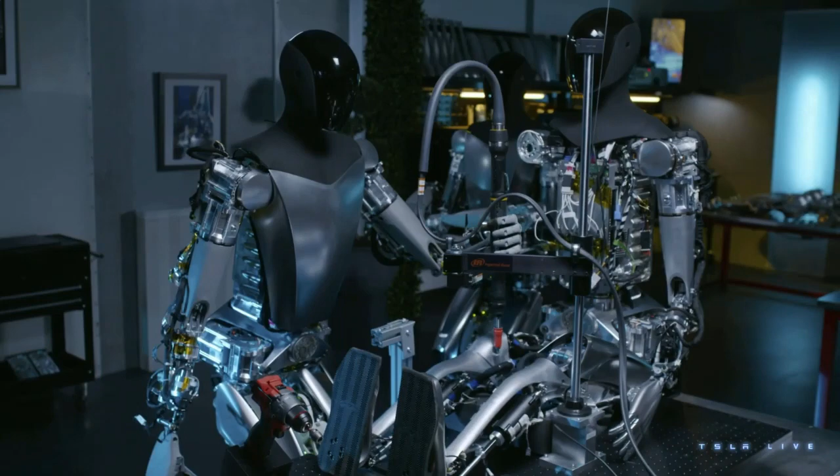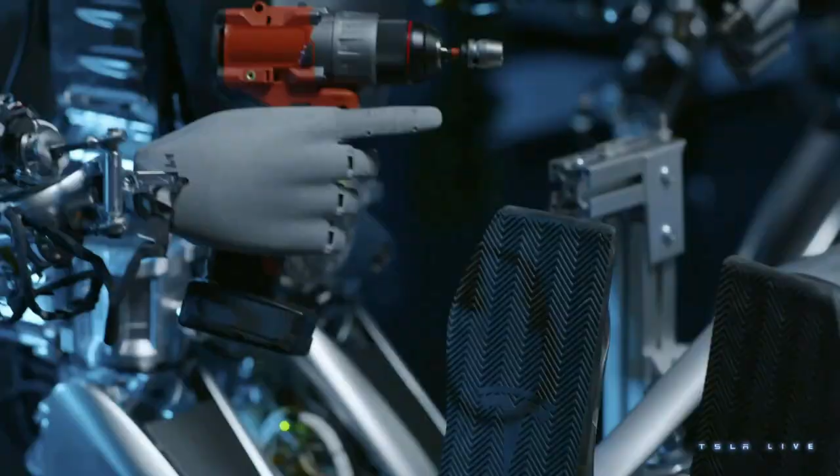Bearing in mind that when we did AI Day, this version of Optimus didn't work at all, so the rate of improvement here I think is quite significant. It's obviously not doing parkour, but it is walking around, and we have multiple copies of Optimus.

The thing that I think Tesla brings to the table that others don't have is that we have the real-world AI. We're the most advanced in real-world AI. So the same AI that drives the car, which you can think of as a robot on wheels, and this is a robot on legs. As we solve real-world AI, and I don't think there's anyone even close to Tesla on solving real-world AI, that same computer and software goes into Optimus.

So it's not that helpful to have a humanoid robot if you have to program every individual action. It needs to be able to walk around autonomously and solve tasks. You should be able to instruct it in simple things by showing visually what the robot needs to do, or just telling it what to do. So I think that's a key advantage that we have.

We also are good at designing things for manufacturing and manufacturing itself. The actuators in Optimus are all custom-designed Tesla actuators. We designed the electric motor, the gearbox, the power electronics, obviously the battery pack, and everything else that goes into Optimus. We were quite surprised to find how little was available off the shelf, because there's a vast number of electric motors, gearboxes and whatnot available in the world, and we found none of them were useful in a humanoid robot, literally none. So you have to custom design the actuators for a humanoid robot.

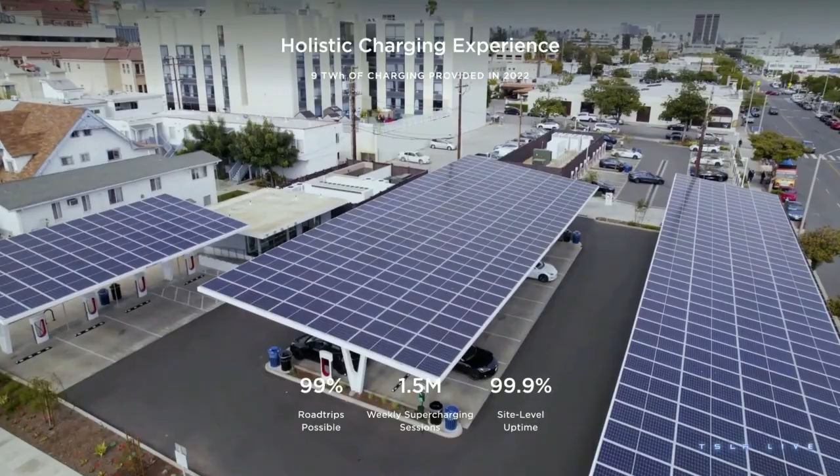We think a lot about what it means to charge at home, even if that home is an apartment or condo, and we spend a lot of time thinking about what it means to charge away from home, whether for daily commuting or going on a road trip. This holistic approach has led to some pretty incredible results. In 2022, we provided 9 terawatt hours of charging across our various charging methods. Over 50% of that was supplied via convenient AC home charging. And when our customers are away from home, they can visit one of our 80,000 charging points, including 40,000 of our beloved Superchargers.

Now, getting here has meant that we've spent 10 years building charging infrastructure when basically no one else in the industry would do it. And while we certainly have a lot of areas that we want to improve, those 10 years have afforded us the opportunity to get pretty good at charging.

First, we have the industry's lowest deployment costs. Our costs are often 20%, if not 70% lower than alternatives, and that goes for both our supercharging hardware and deployments and our AC charging product lines. A lot of reasons that we're able to achieve this, you've heard a lot of them here today. We're vertically integrated. We manufacture and engineer all of our own charging equipment. We share components across our different product lines. And on the supercharger side, we also install and operate all of our own sites.

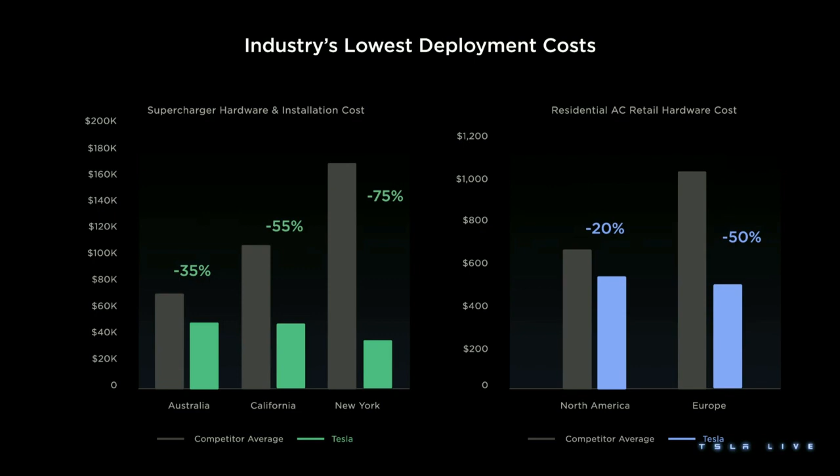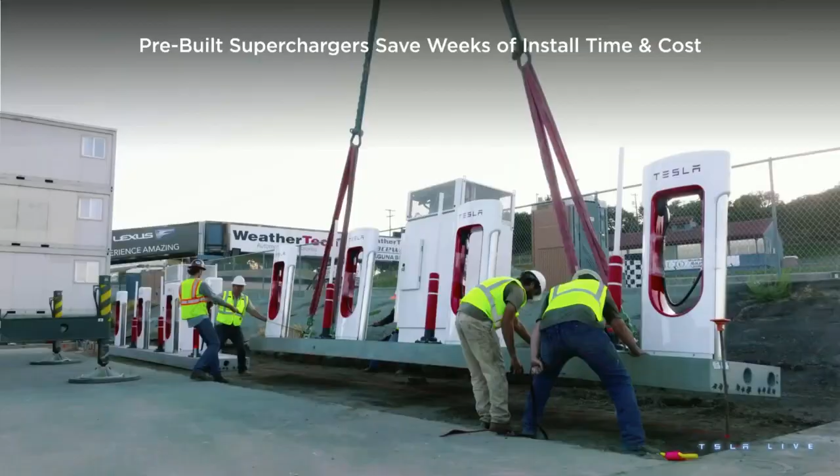And that's led us to be pretty obsessed with finding new ways to innovate around installation. As an example, we have recently extended our excellence in manufacturing to how we build supercharger sites. We are pre-building 4-post supercharger units at our factory in New York. We load them on a truck, we truck them to site, and then we crane them into position. This method saves us 15% on our deployment costs, and we can install a site in a matter of days.

Once we install a site, we also operate it really efficiently. Over the last few years, we've been able to cut our per kilowatt hour cost by 40%. Again, a lot of reasons for this, but one at the top of the list is we've focused on increasing our site utilization. Site utilization is just how many sessions or kilowatt hours can we push through a site or a post. Basically, doing that allows us to spread our cost over more sessions, thus lower cost per kilowatt hour. But of course, that's easier said than done, because when we push up site efficiency, the risk is that we have a poor customer experience and wait time at our sites.

This is where Trip Planner comes in. Trip Planner is our in-vehicle routing or navigation system. Other electric vehicle manufacturers, some of them have vehicle-side data. Other infrastructure providers have site data, but at Tesla, we have both. And what that allows us to do is use Trip Planner to route vehicles towards available sites and away from congested sites so we can balance our utilization without risking wait time.

And the results speak for themselves. Over the last few years, we've been able to drive up site utilization by 30%. That means lower per kilowatt hour cost, while also cutting our wait time in half.

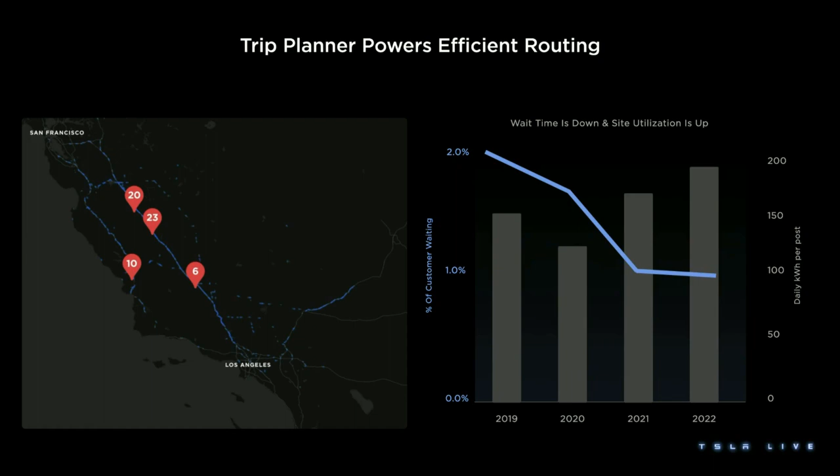And we think this can get even better. Today, we're feeding Trip Planner with real-time site information and information about vehicles currently at sites. Going forward, we'll be moving that to projecting site occupancy based on the understanding of what vehicles are currently routing to those sites. And ultimately, our vision for Trip Planner is that it's the air traffic controller for electric vehicle charging across all infrastructure on a global basis.

And the last thing we focused on to get here is quicker charge times. We're really proud of what we've been able to accomplish here. We've shaved off 30% of our charge time, average supercharging site visit time, over the last few years. This has taken improvements on the hardware side, with our software, on our vehicles, and on our infrastructure, and we're really excited to continue pushing this trend down.

Looking forward, the job does not get any easier. As you heard earlier, we aspire to a fully electrified global fleet. That fleet, from an industry standpoint, needs 9 petawatt hours of charging on an annual basis. And while Tesla charging certainly doesn't have to supply all of that, it does require that, for our part, we have a few new focuses in order to scale.

First, if you want a fully electrified global fleet, all of those vehicles have to have a great and reliable charging experience. So, as many of you know, recently we have started opening up our networks on a global basis. Over 50% of our superchargers in Europe are currently open to other electric vehicles. We've also opened up in Asia Pacific with our first sites in Australia. And just yesterday, we opened our first 10 supercharger sites here in North America and the US to other electric vehicles. We've also invested a lot to be able to make this a really easy experience for our new customers.

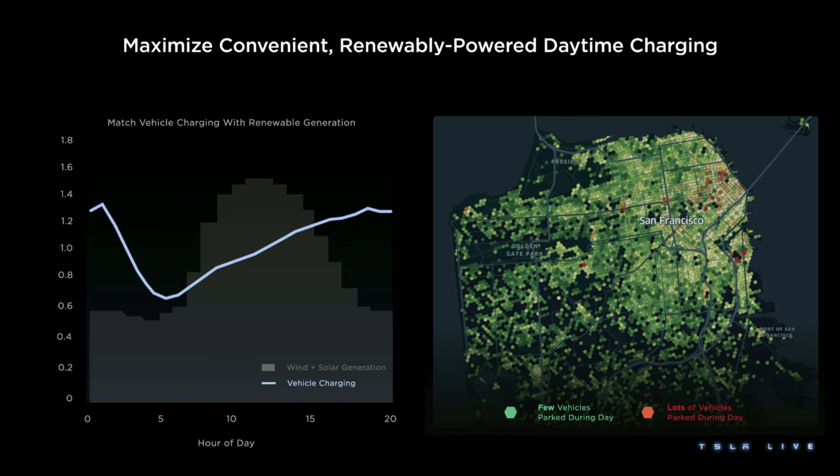This chart is on an aggregate basis for the US, and it varies based on what your renewable generation sources are locally. Basically, what this shows is we want to move that charging curve, and for solar and wind in this example, that means more daytime charging. We think the best way to go toward daytime charging is to install AC charging that is convenient and low cost everywhere vehicles are typically parked throughout the day. So that's the plan. While supercharging and home charging definitely stay a big part of the puzzle, our teams are currently scaling to install AC charging everywhere vehicles charge during the day so we can power them from renewable sources.

So summing it up, while we've spent 10 years installing infrastructure that is low cost, efficient, and provides a great customer experience, we're really just getting started when we talk about supporting Master Plan Part 3. We've got to scale capacity on an industry-wide basis to 9 petawatt hours annually. We've got to open up to non-Teslas and make the charging experience for everybody really great, and we've got to power all of this via renewable sources.

And one more thing, yes, we've got to scale our infrastructure, and yes, we want to power it via renewable sources, but we're Tesla, so we also want to make sure that we're continuing to focus on providing really incredible charging experiences. With that, I want to welcome up our leaders of supply chain, Roshan and Karn, to talk a little bit about that topic.

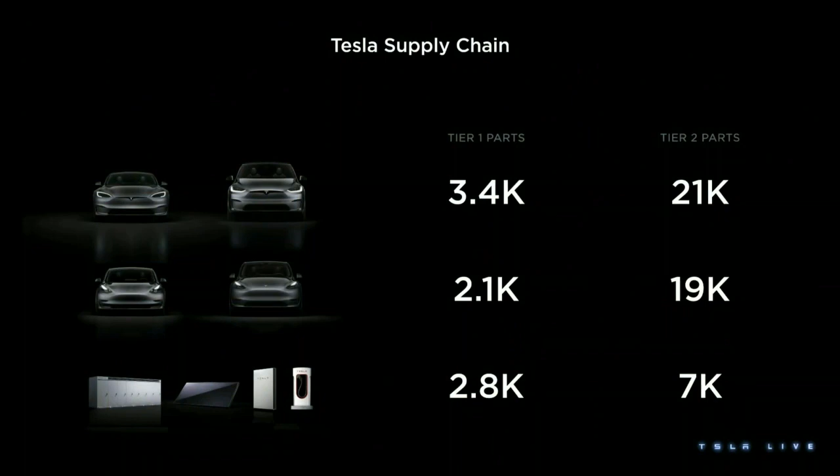This board is equally complex. It's also double-sided, 8-layered. And these boards, these computers run so hot at peak operation that they have to be liquid-cooled through a heatsink. So this assembly requires taking those 2 boards and then bonding them to a heat sink that's hermetically sealed as an assembly, flashing the software and all that sort of stuff.

And then that's one part number that comes to Tesla. So this is an example of one tier 1 part number that's a very complex assembly to manage at the tier 2 level. There's more than 7,000 components here. A component is being assembled onto a car computer every 1.4 milliseconds. The line that builds this computer is the length of a football field.

So it's quite complicated. Initially, when we first started building this board, due to the complexity of it, we had to rely heavily on labor. But once we dialed in the quality, the rates, and the yield, we started focusing on making this more efficient. The only way to control cost is by removing labor. The first step is removing labor.

So this was looking back, right? This is how we got here. This is how we got from 0 to 40,000 cars a week. Let's talk about how we get to 20 million. So the question gets asked, is Tesla going to basically break the chip industry if we grow to 20 million vehicles? The answer is no. But let me walk you through the logic on that.

So as it stands right now, a Tesla enabled with a full self-driving computer has 4 times the silicon content of a regular vehicle. So at about the 2 million run rate, we're consuming about 700,000 12-inch wafer equivalents. That's the industry term that's thrown around for capacity in silicon. That's how much we're using, so a little bit below 1 million. And the global wafer capacity, based on the estimates we've seen, is about 135 million. So we're about 0.5% of the industry.

Not a lot. Now, if you get to 20 million, when we get to 20 million, and if we don't make any simplifications in terms of part count, which is also a separate work stream, I think Colin talked about it, Pete talked about it, we're not going to have all these different components. We're really going to simplify the architecture because simpler is better. But even if we don't do that, and we take the most pessimistic case, we're going to need 8 million wafers, okay? And the industry is going to scale to 200 million by that point. So still, we're less than 5% of the market share.

And if we run the same offense we ran all along and continue to work with our partners and invest in fabs and invest in capacity, we'll have the capacity ready by the time we need it. So I really don't see this as an impediment from a supply chain perspective to get to 20 million.

Now I'd like to talk about a page we took out of the electronic playbook and applied it to the mechanical side. Our vehicles currently use heat pump-based technology for the thermal system, but before the heat pump, our vehicles used to have a dispersed thermal system connected by hoses.

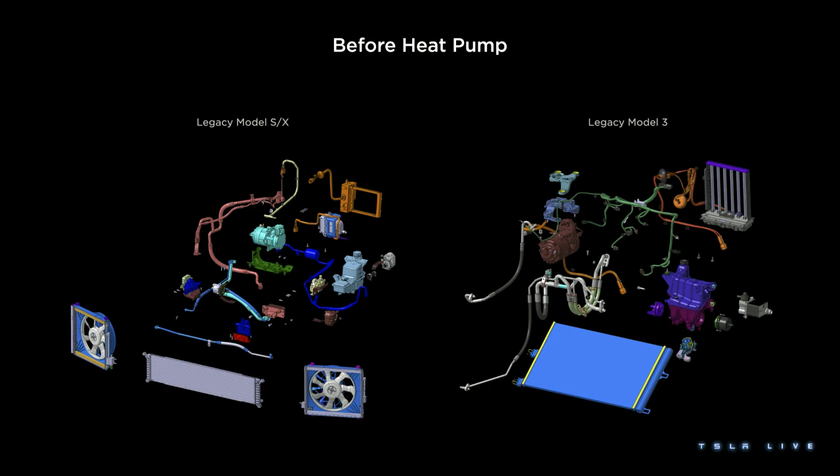Engineering was inspired by circuit boards and created a system which was extremely integrated, where 60% of the system was the size of a basketball, containing about 100 components, 50 sealing interfaces, and several different manufacturing processes, all packaged into this tight size. Now why are we talking about this?

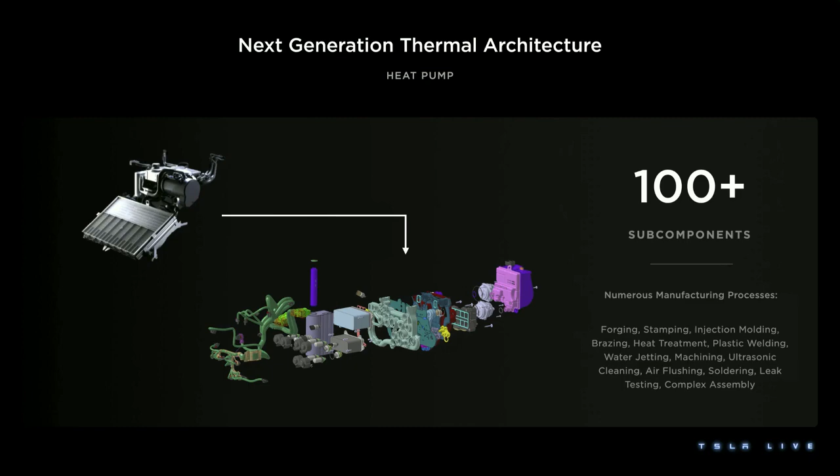We launched this system right during the outbreak of the pandemic in Model Y. The team was forced to manage 100+ components from different suppliers around the world remotely.

There are 4 videos playing at the same time. One is the manual line that was created when we started production, and this manual line produced a lot of quality issues, let alone throughput. So we quickly pivoted to a semi-automated line. But in spite of that, although the throughput was great, the quality issues sustained. So our team decided that fully automated is the only way to go.

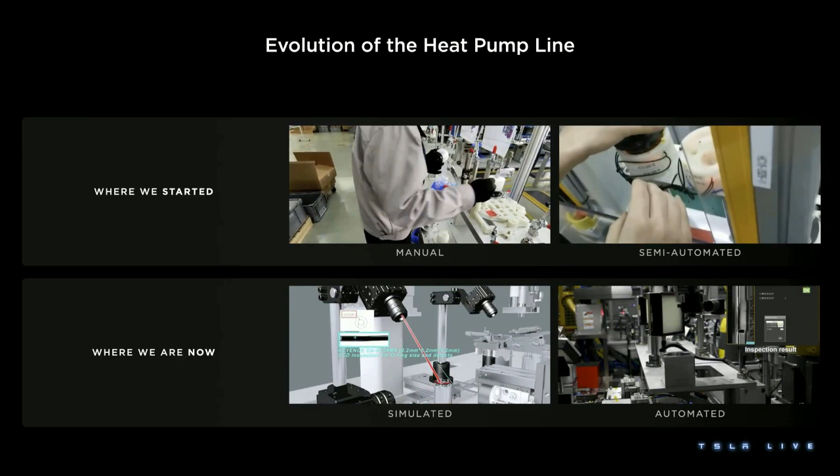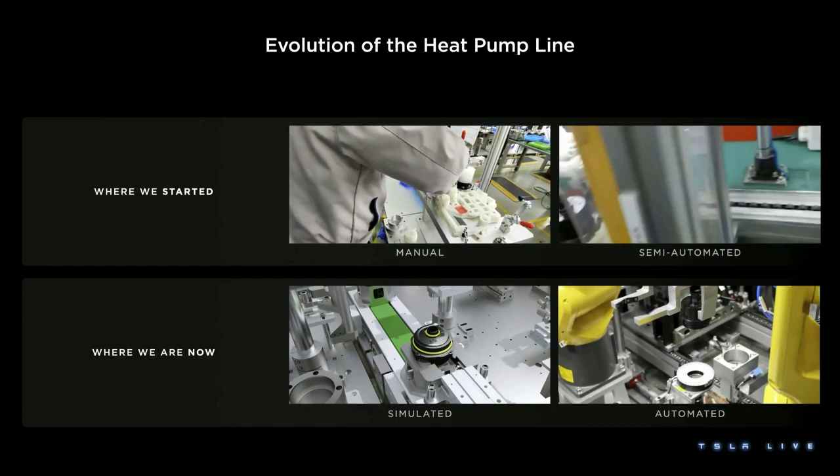Before we automated the line, we created a 3D simulation. Not many companies or teams have this capability, where now when a part gets spec'd, we have the ability to create a 3D simulation of all the complex sub-assemblies involved in making the part, and tell the suppliers exactly what equipment to purchase, what to test, and create an end-to-end line in simulation. And that's what we did here.

With the help of the simulation, we had a very detailed sub-assembly cell, which was juxtaposed with the supplier's factory layout. After a back and forth of iteration and optimizing the processes, we implemented this fully automated line in less than 8 months.

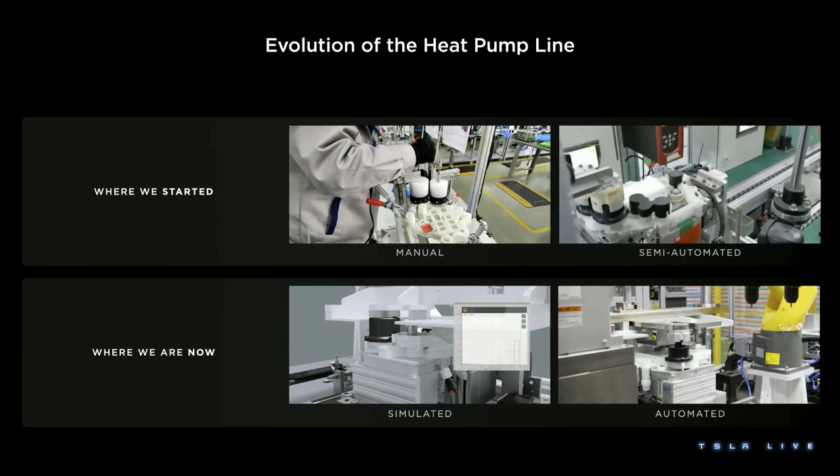And the results were remarkable: a 99% reduction in labor force. So a line that would need 1,000 associates to build the super manifold in full volume now just takes 10 associates. And the quality also went up by an order of magnitude.

We have a defect rate of less than 0.005%, and a super manifold rolls out every 7 seconds because we've created many automated lines. And these factories are the size of 2 football fields, by the way.

Roshan had to one-up me on that one. 99%, 2 football fields.

So why are we talking about this? In a world where labor costs are increasing, labor participation is decreasing, there's a huge turnover, and the cost of implementing automation is going down by 3x in the next 10 years, this is how we are thinking about complex assemblies. We are going to push this type of thinking into our supply base more and more, who will be building our complex assemblies. This is the only way we think we can confidently scale to the 20 million vehicles target.

To summarize, we have laid the foundation in getting ready to execute Master Plan 3. Our strategy is supply chain design simplification. We are going to make sure that we have more control into the tiers of the supply chain. We are going to grow responsibly and sustainably with our long-term partners, and we'll automate.

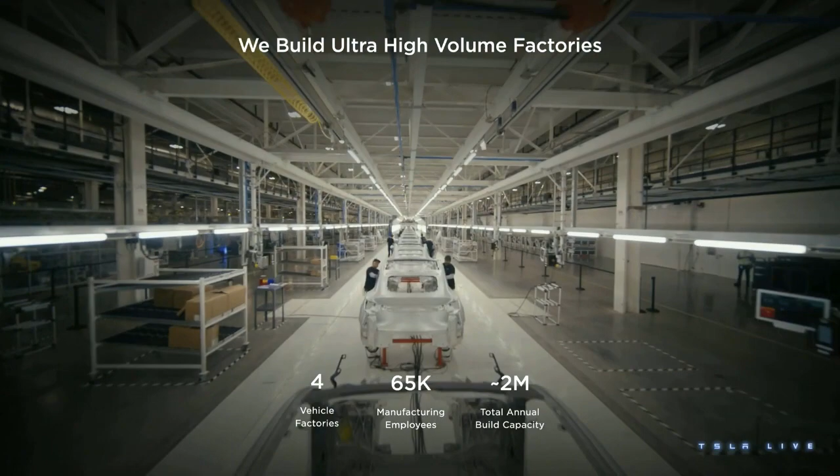Right now we have 4 vehicle factories on 3 continents to serve our markets. The total number of manufacturing employees is over 65,000, including our amazing team in Reno, who make powertrains, battery packs, and drive units for our vehicle factories. The total installed capacity across all these vehicle factories is about 2 million cars a year. We're always looking for opportunities to grow more capacity from the existing footprint, so you can expect this number to grow over time.

People always ask me how Tesla can build a factory that fast. Really, we learned a lot from our Fremont factory. We talked to the survivors from the production hell and tried to avoid all the mistakes we made. We decided to design a straight line with the minimum number of ups, downs, and turns for easier manufacturability and easier construction. We also challenged all the assumptions people ever knew about building a vehicle factory. When we deleted and simplified all the redundancies and buffers, that helped us save a lot of time.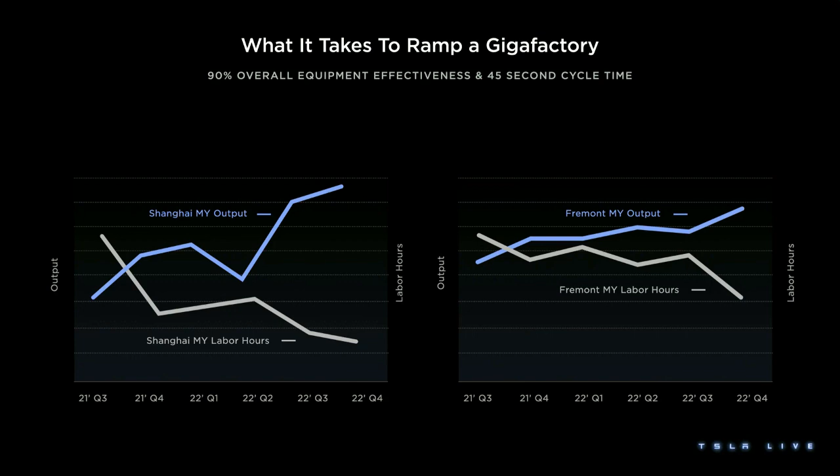And actually this factory keeps setting new records—yesterday they just had a new factory daily record. Congrats, Fremont team. So how can we reduce the cycle time and keep improving efficiency?

We follow the philosophy Elon shared about building rockets, which is questioning—basically finding the right problem to solve. We start with delete, simplify, then we try to accelerate, pressurize the line, and find out if the solution actually works.

And at last, we think about automation. There's one example in Gigafactory Shanghai. In the paint shop, we found an overlap baking range between the PVC sealer and the top coat, which was done by two different ovens. We decided to combine the two processes. That helped us not just reduce cycle time, but also save 9% of energy consumption and 9% of CO2 emissions.

Also, we commonized the S/X design in Fremont. Right now we have a common body and common headlamp. We eliminated about 40 parts and reduced about 10% of the cycle time. All these improvements really help us get to a faster ramp trajectory.

And we didn't just learn from these high-volume existing factories, we also learned from the new factories. Most recently, our Berlin factory team implemented a 5G private network on the shop floor, which helped us overcome about 90% of the overcycle issues for a particular process in the GA shop. We're going to soon implement this globally.

Thanks, Tom. Yeah, we're not just talking about new vehicle factories, but also new cell factories, and we're going to talk about how we follow the same model when we do so. But first, I thought I'd provide a little update on cell production. Remember Battery Day, we showed this video with the spoon and how we went from dry powder to film. Let's just say there's no spoon now.

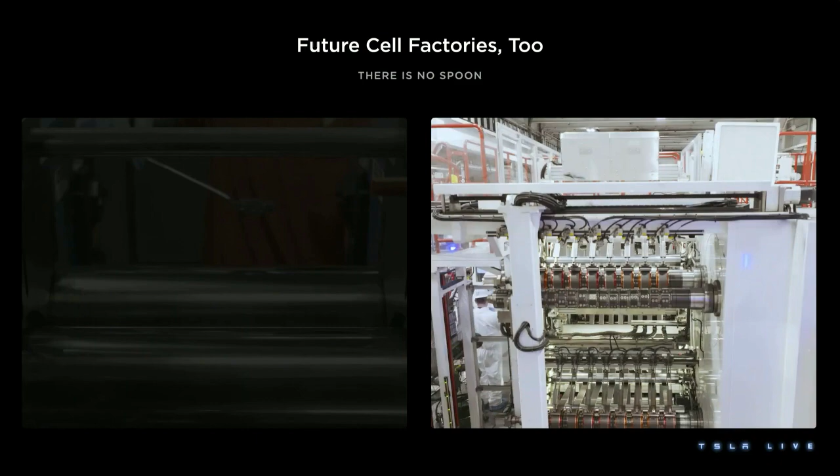Many of you in this room saw this on your tour today, but here is our dry electrode machine here in Texas, one of the lines we have installed here. Fully automated, no spoon, from powder and foil in to coated electrode out. From a peak productivity perspective, per tool, this is over 20 times the productivity of the tools we showed folks on the tour in Kato back in Battery Day. So we've made a lot of progress on one of the key parts of the cell manufacturing process.

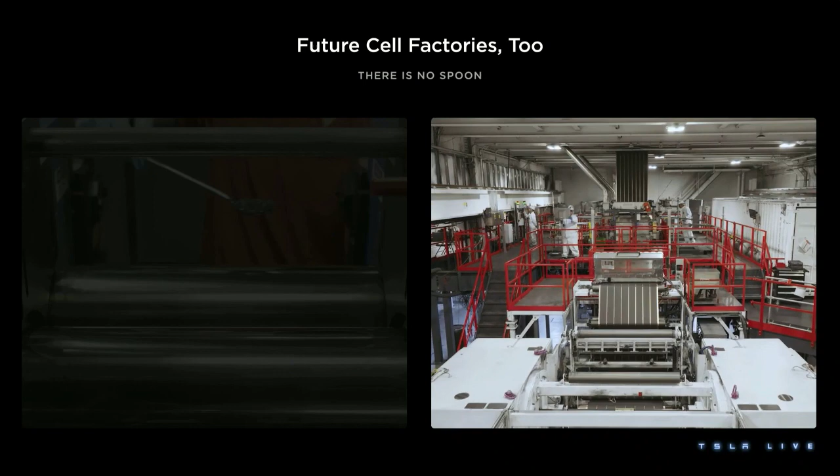What this actually represents is a series of actions taken by a very integrated, holistic design team across product design, manufacturing design, process design, equipment design, and facility design. They all need to work together to make this happen. As an example of simplicity up, investment down, and scaling up, we've reduced the number of parts in the cell and significantly reduced the number of processes. Collaborating across those five design groups, we've been able to end up with a factory that's 10 times smaller volumetrically, meaning it's faster to build. It's much lower capex per gigawatt hour output, and we can scale to our objectives of 240 total terawatt hours, 1 terawatt hour a year of stationary storage, and 20 million vehicles a year, with the scalability required to achieve our goals.

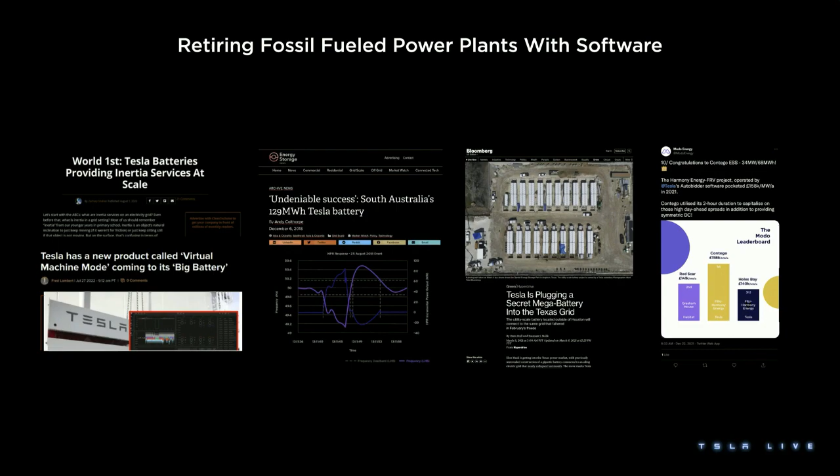So there wasn't a solution that existed in the market, so we built one ourselves. In the markets we've deployed them, in Australia, in Texas, in the UK, it has proven to be a market leader. We're continuing to invest in AutoBidder as we expand to new markets.

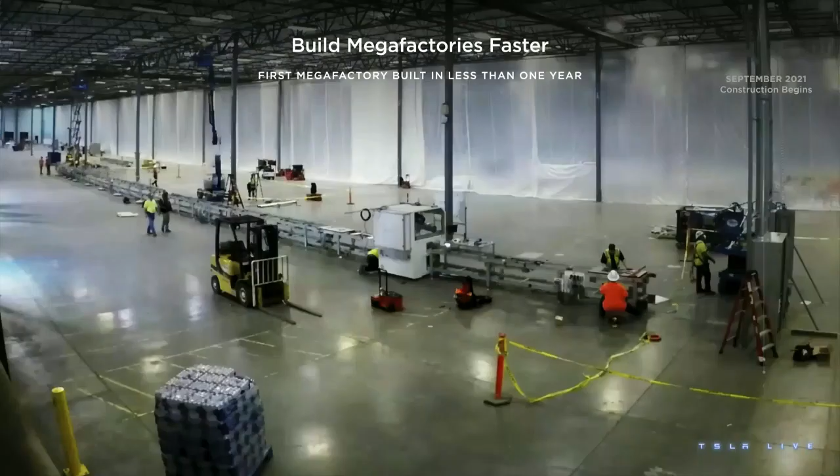Second point of how we got here: a relentless focus on speed of execution. First, in building factories - what you're seeing here is a time lapse of the mega factory built in Lathrop. We took it from a JCPenney distribution center to a world-class manufacturing facility in less than 12 months, which is incredible.

Really, the way we did this is similar to what my colleagues have described - leveraging the vertical integration of Tesla, getting the vehicle manufacturing team in the same room as construction and engineering, and making decisions quickly with all the stakeholders and decision makers. We're using the lessons learned from Lathrop as we plan for our next factories.

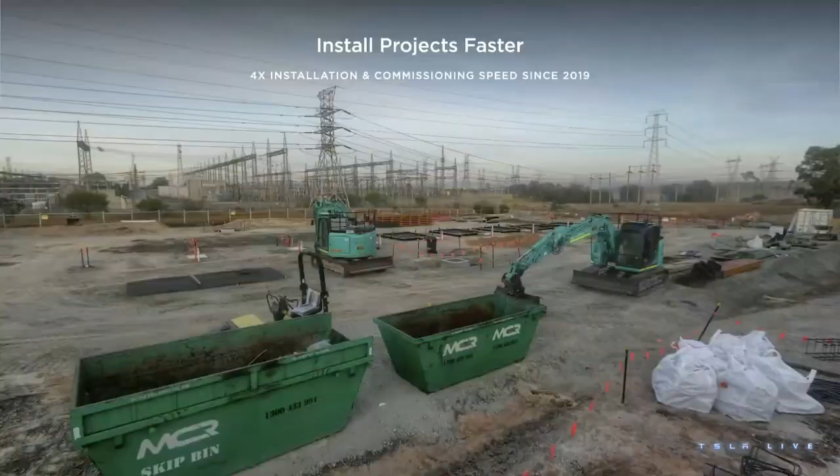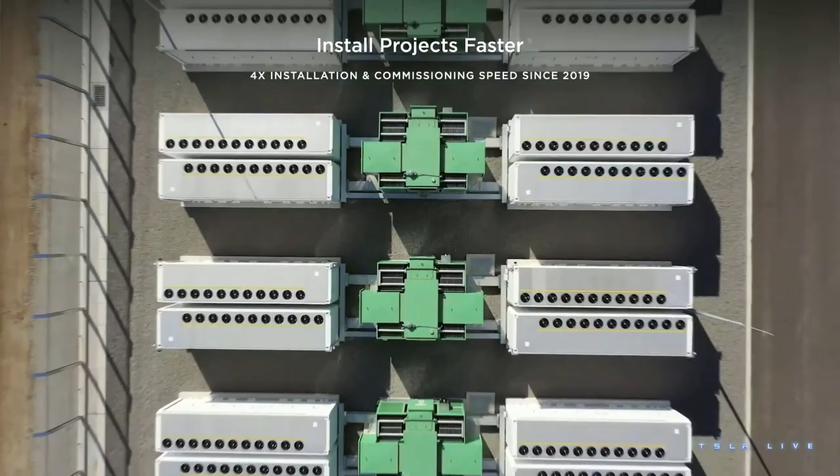Second, it's about installing projects faster. Plug and play is at the core of what we're going for. Over the past 4 years, we've increased installation speed by 4x, and reduced total labor across both construction and manufacturing by 3x. We think this is key to unlocking our ability to scale and our customers' ability to scale with us. We need to be laser focused on reducing the time from when the Megapack leaves the factory to when it is operational on the grid.

It's not just about centralized storage, it's also about distributed storage - the future roadmap here at Tesla. Maybe some of you know about the retail plan we have here in Texas, and I wanted to talk about how that all fits together. Tesla Electric really unlocks the full value of distributed energy and storage products, enabling our customers to become their own utility. The data on the page is from our South Australia virtual power plant, another Tesla Electric setup we have.

Over 2022, we have data for 5,000 customers. You can get a sense of what's happening. If they were being provided default utility service, the cost of serving them electricity averaged $140 a month. If they all had solar and Powerwall, but it wasn't interacting with the grid or participating in the energy market, the cost of serving that customer would go from $140 a month to $70 a month.

If Tesla Electric is operating those assets in an intelligent way to benefit the grid - Tesla Electric being software we developed out of AutoBidder for these distributed energy resources - we can actually pay customers to bring their energy services to the grid. That's what happened in Australia last year.

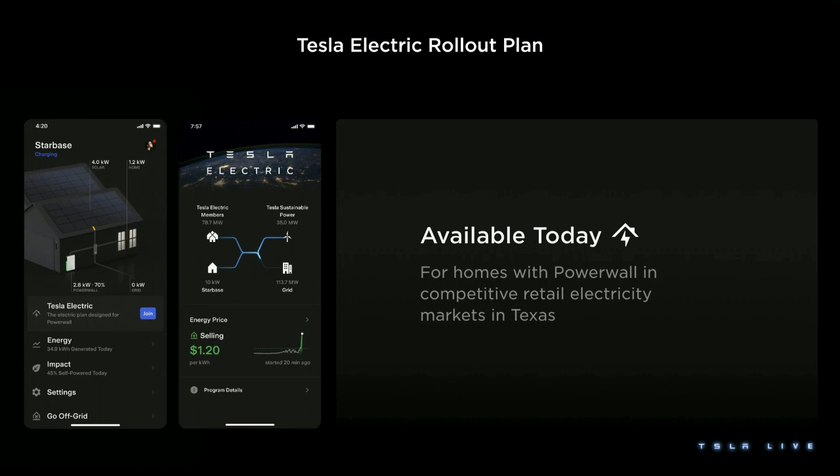Over 1 billion people live in markets with competitive retail electricity, and there's over $2 trillion in annual energy spend in these markets. This is a huge opportunity. Our intention is to bring this to market by market in the same way we've approached Tesla Insurance, where we can bring value to our customers to reduce their total cost of ownership of our products.

So what we're going to do next - and this is pretty exciting here in Texas - by this summer, we're going to offer a retail electricity plan to people who have our cars where they can have unlimited overnight home charging for $30 a month. This is part of reducing the total cost of ownership of our vehicles.

The reason we can do this is because Texas has a ton of wind, and in Texas the wind blows at night. So serving these customers with electricity at night for their cars is the best thing to do for everyone. This is a way to incentivize people to charge at home at night directly from renewable power. It's part of the grand master plan we talked about at the beginning. We're very excited about this, and we see it, similar to Tesla Insurance, as further reducing the total cost of ownership of electric vehicles.

So putting this all together, we're really at the beginning of this massive ramp in energy storage deployment. Reflecting back on the master plan, we talk about needing tens of terawatt hours of stationary storage. We have our sights set on annual production rates of 1 terawatt hour, which is 25x our capacity at Lathrop. In the near term, we see really strong demand for the Megapack product - over 100 gigawatt hours per year in 2023, growing by over 100 gigawatt hours per year over the next few years. So the demand is there.

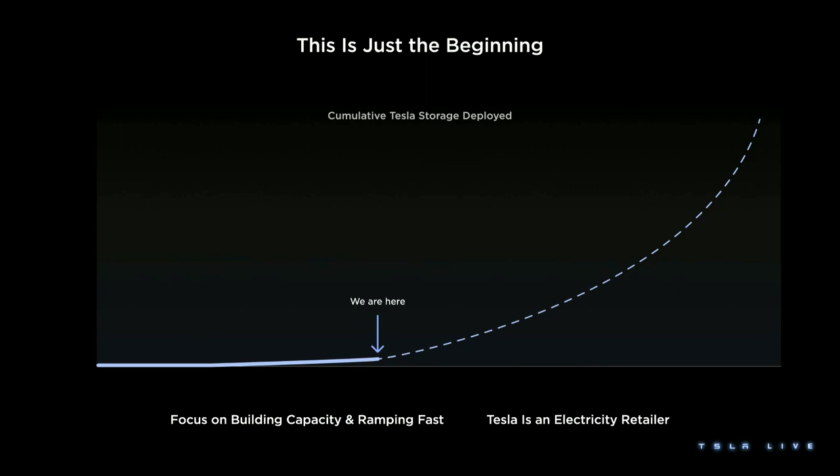And naturally, as we continue to focus on cost, speed and value, it's clear we need to build more capacity and ramp it quickly. So while the challenge is big, it's also a huge opportunity for Tesla and for the Megapack business. I'm excited to see the impact it's going to make on our grid transition.

As am I. Yeah. All right. Thank you. Thank you all. Yes.

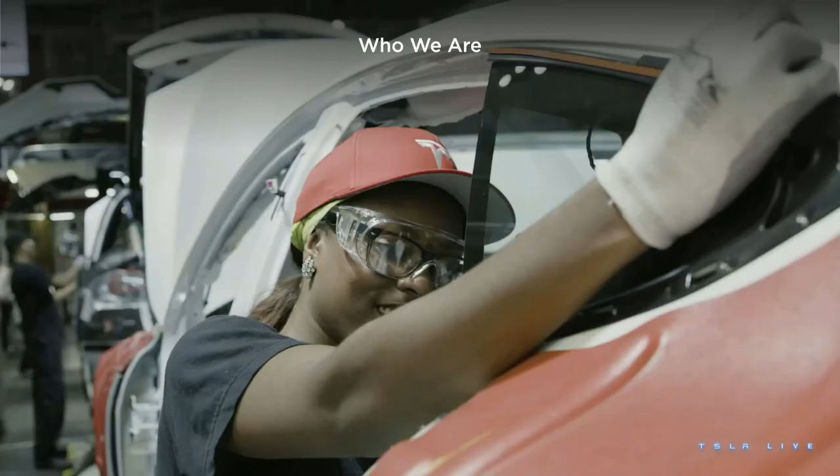And of course, that starts with our awesome team members. You've heard a lot today about our amazing products, our process, our software. You've seen lots of numbers and lots of graphs. You've also heard a common theme, and that theme is that Tesla's team is what drives our success and makes a difference. Whether you're in our factories, in our sales, service, and delivery centers, our warehouses, or in the field, you can see and feel the collaboration that's happening, and the pride that everyone has in working for Tesla.

So before I go on, I want to give a big shout out and a thank you for our Tesla team globally. So let's... That was great, that was great.

Thank you. So we are creating a lot of meaningful work through our jobs. We're a huge employer, and we're growing every day. We're at 129K. More than half of our team works in vehicle manufacturing, and almost 60% of our team is based in the US.

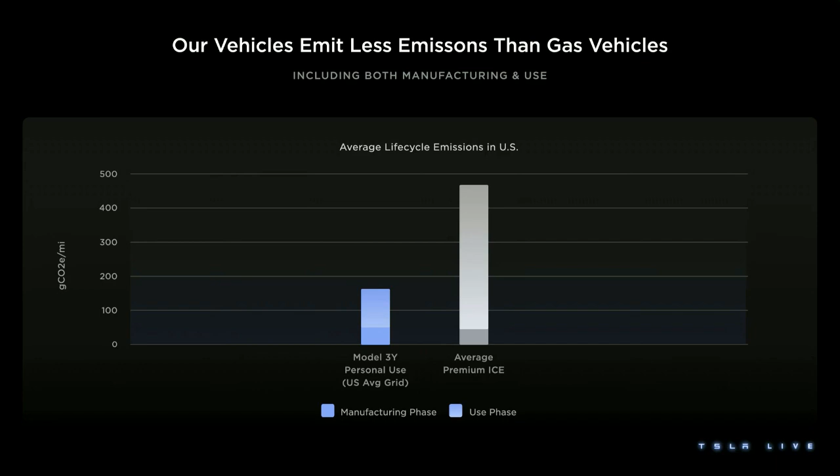As we build our zero emission future, we've been talking with our stakeholders and shareholders about how to improve our reporting framework. We are aligning with the TCFD, which I know many of you have been asking us about. I also want you to stay tuned, because there's going to be much more coming in our impact report.